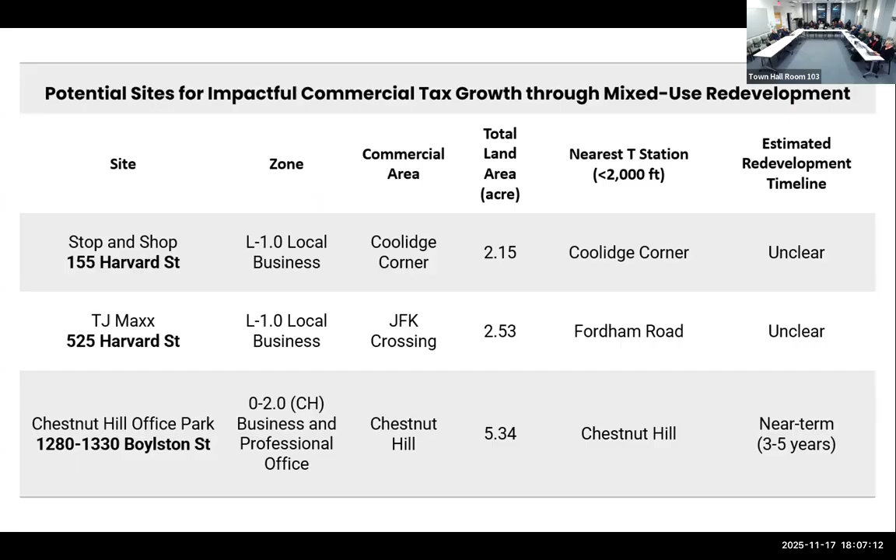Okay, so we've been talking a lot about the Chestnut Hill Office Park site because we have a live developer in the mix, who is providing real-time feedback on our proposed zoning and what that would translate to in terms of applicability. But also the Chestnut Hill Office Park site is unique, given its significant economic development potential. It's also double the size of both the Stop and Shop and TJ Maxx sites at 5.3 acres. So it's unique in terms of the study area, and it's unique town-wide. It's certainly a catalytic parcel within the scope of everything we've been talking about in rezoning and revisioning this area.

So speaking of tax revenues, I think this was presented to the Economic Development Advisory Board and the EDAB subcommittee, but I don't think the Community Advisory Group has seen these.

So we keep tabs on the kind of contribution from development projects that have been sponsored by the town's Economic Development Advisory Board, and what they've contributed to the tax base on an annual basis. The Economic Development Advisory Board has been around for 30 or so years, and this is a reflection of the projects they have championed and what the results have been.

In terms of additional contributions to the tax base, for FY25 the blue represents property tax and the orange represents rooms tax. For FY25, the rooms tax number isn't accurate yet, it's still an estimated number, but the property tax number is valid. Within the past year, about $7 million in property tax revenue, and we fluctuate between $1 million and $2 million for rooms tax revenue, through hotel room tax.

Looking more granularly at the properties that feed into these numbers, 2 Brookline Place medical office space generates about $1.7 million a year. Then a slate of hotels are our next highest contributors, with a range from a little over $500,000 to closer to $1.4 million. Then you have some office buildings — 10 Brookline Place West brings in a lot more tax revenue than that. This is just what EDAB claims as their portion that they helped support.

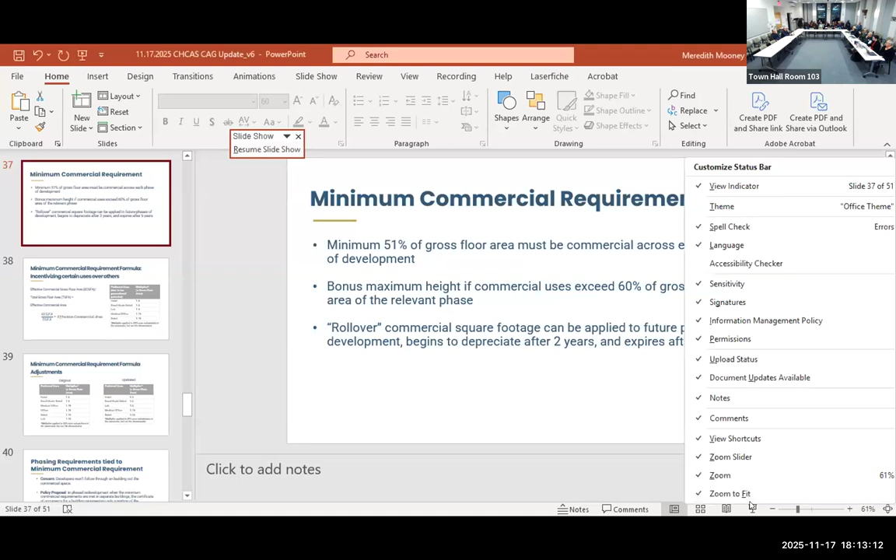The difference between the 45% and 61% is due to the multipliers given to specific uses. So all of the uses are the same, but the calculation is modified to reflect that certain uses are preferred either for their tax generation or because they're desirable to the neighborhood.

Sorry David, do you still want me to pull up the table? Nope, that the merge would be? Okay, drive on. Okay.

This is the existing zoning. It's a little choppy. A quirky element is that office of this block is under two different zoning districts. As you move closer to Hammond Street, it's kind of this puzzle piece effect where you're splicing together different commercial districts. This is Commercial 2.0, Commercial 1.0, residential.

This was back from June 2024, from a simpler time when we were just focused on the land use and how we would circulate through the commercial area, and not yet getting into the work of confronting the density that would be required to support some of these uses that we've identified here.

You can see also, based on the community engagement work and what we pulled from that, this concept of the central connecting greenway shows how early on we were focused on an east-west orientation for the buildings, which we've now come to understand that north-south orientation is a better fit for the study area.

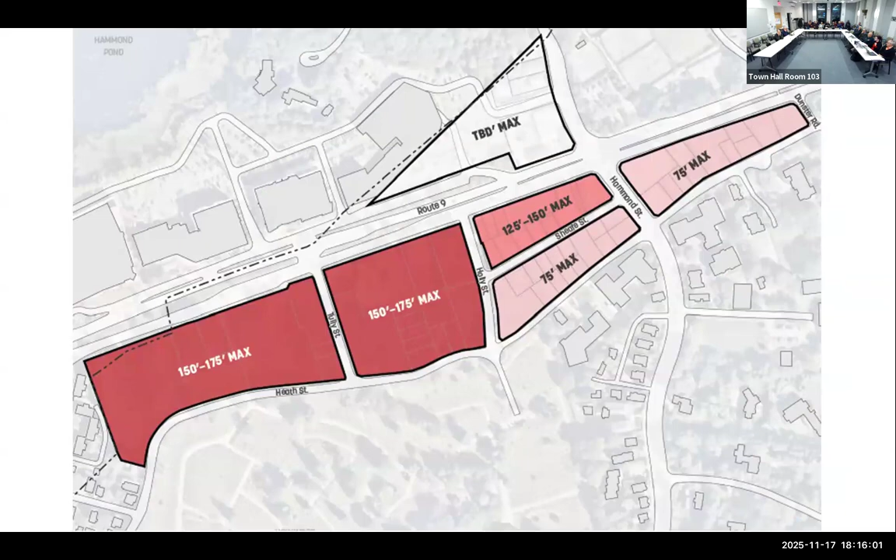Can you just remind all of us the current maximum heights? For...

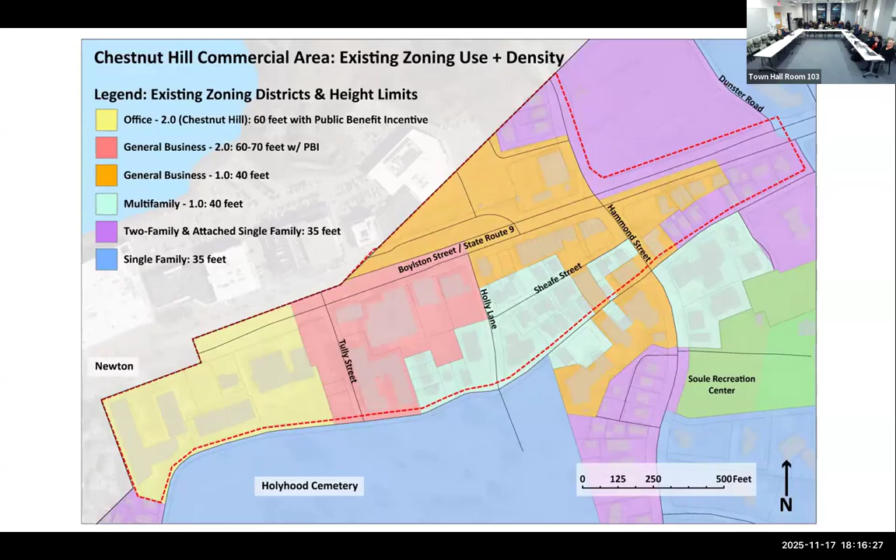The neighborhood mixed use is a combination of 40 feet along Hammond Street. 35 for the single family, and 35 for 2-family, 40 for the multi-family and general business in the 1.0. It's 60 for the office.

And here, Martin Zogren from Sasaki is going to be presenting the more comprehensive set of the draft design guidelines in a moment.

But this is the visualization, which I think we've been looking for a while in these conversations, of the proposed zoning envelope. We've made some modifications in terms of the sky plane proposal we had from Heath Street and the way that we structured the setbacks and step backs from the western edge, to push the height more towards the Tully Street side of the Chestnut Hill Office Park block.

So a key issue that was brought up in community advisory group member discussion, and then in public comment at the last meeting, was why 12 or 14 stories. People are still not totally comfortable, or very uncomfortable, with the idea of 12 to 14 stories.

I think we've been incrementally talking about the zoning components and how we landed here, but I did want to explain my thinking about how we landed on this recommendation. It's a combination of multiple factors.

Thinking back to the exercise that RKG did back in December 2024 with the lower scale level of development, what that looked like, and what the perceived trade-offs were at that point.

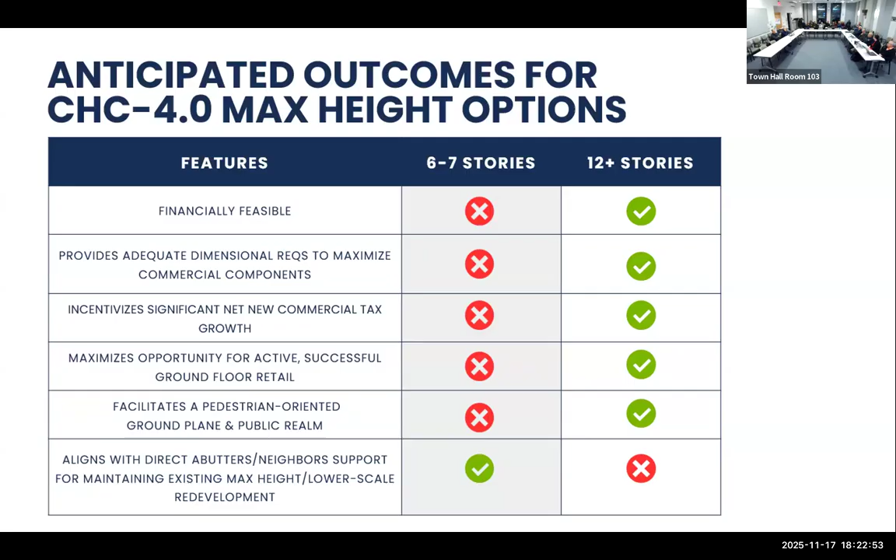Can you just explain why lower scale development has more parking requirements and is less pedestrian friendly? Why is it more auto and car oriented? Well, there were a bunch of things said in there — not pedestrian friendly, or auto intensive, and more parking.

So this was the RKG scenario. I think it's questionable whether this would do well — this isn't a financially feasible scenario, but you see the driveways and car access spaces dominating the smaller scale buildings.

You're going to need a smaller scale. You can't do underground construction. That's not going to pencil out. So you've got the parking, surface parking, in the surface parking or within the building.

And then there's tension between the parking at grade and the ground floor retail. They're going to need the parking accommodation, so you can't make as much ground floor retail.

I know this is a bigger discussion, but it depends on the proposal. You could do an underground parking that straddles two buildings, and the only part that is surface is, for example, the yellow building on the left—parking that goes from the yellow building on the left to the pink building on the right, including that plaza underground, and then above ground have those two units.

So it all depends on how it's all one property, how it's developed. I think I would look to George or Ken from the EDAB subcommittee to help address that question.

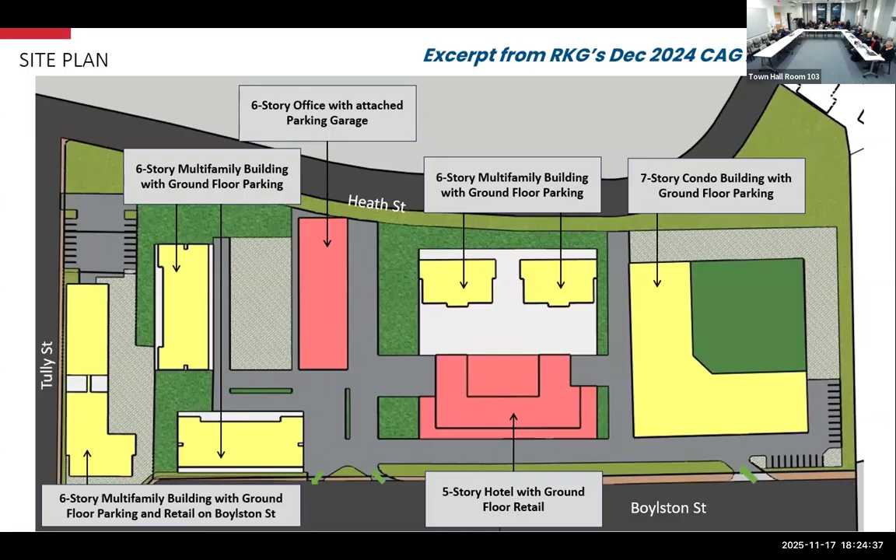So that's an interesting question. Underground parking is great, right? But the problem with underground parking is every underground space costs about $120,000 to $150,000 a space, and you generate very little revenue from it. So you need an enormous amount of development supporting that one parking space. That immediately drives a larger building.

If you want smaller buildings, then you're almost required to do surface parking, which just means a lot of blacktop. I think that's the short answer to the question. Thank you, George.

I'm just curious whether we're going to see some of the data behind the penciling out. I think it would be really informative to understand the numbers that inform some of these decisions. Well, I don't know that we're going to see that this evening, but if City Realty at some point wants to provide some of that, I think it would be very interesting to look at it.

The only other way to get at that would be to look at some other developments that have been completed where we can get data. But I appreciate the question. I understand the question—is that basically what you're saying as well?

Did you do this? We did extensive pro formas, and Ken Lewis—I have to give him credit—he did spreadsheet after spreadsheet after spreadsheet, really complicated analyses that incorporate not only parking requirements but parking alternatives, height, and how much they paid for the land.

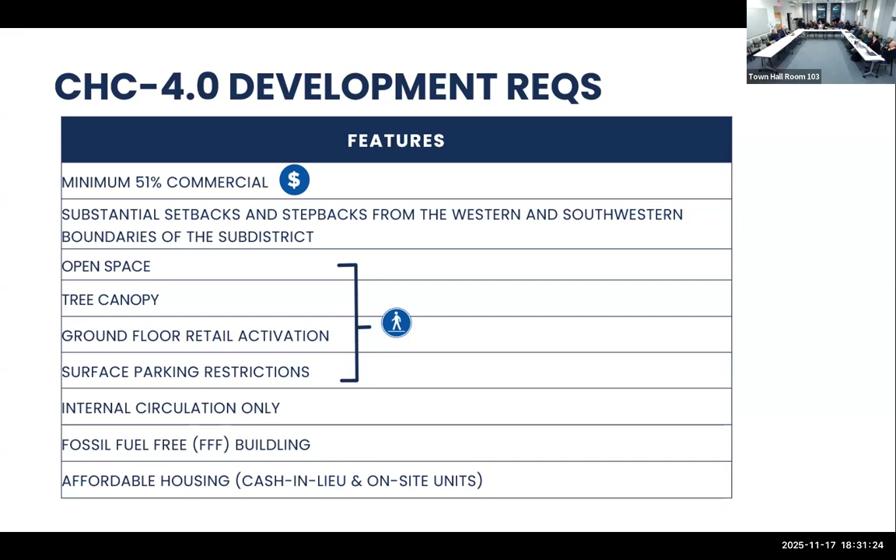So it doesn't really matter if it's 12 stories or 4 stories. But Carlos, it goes to feasibility. The affordable burden will inevitably require more square footage to support it. I think when people drive around outside of Brookline, to places like Rockland or Allston where there's a lot of housing development, they see 8 stories, or really it's more like 5 over 2 or 7 over 2, and they wonder why this brand new building can be 7 stories and why can't we do that here.

Well, if you didn't have any commercial requirement, you might head more in that direction, but when you add the requirement for commercial, that reduces the available space. But there are examples of ground floor commercial, you can see them on Market Street. Yeah, but there's a difference between ground floor commercial and a hotel, or a medical office building - those are very different situations.

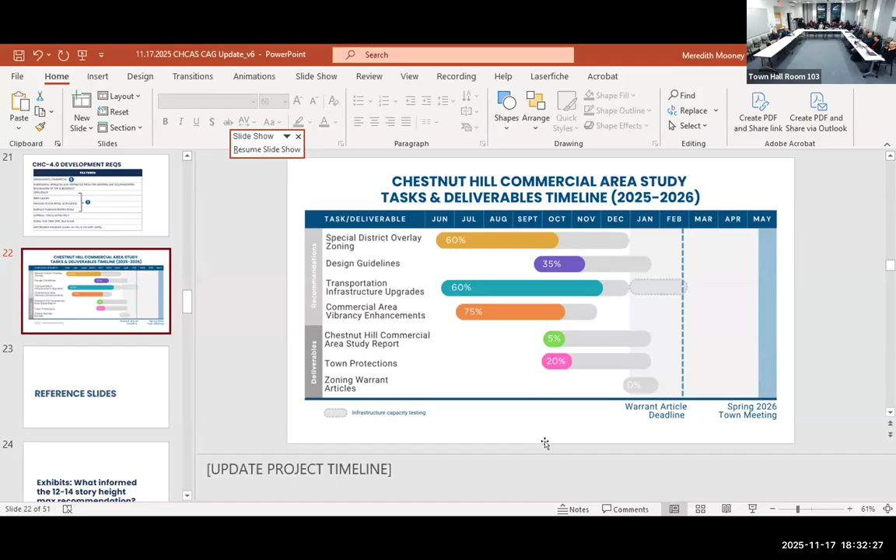Just a quick status update on where we're at in developing key recommendations and deliverables. We're still making gradual progress on the zoning, with some push and pull between the zoning and the design guidelines, which we're a little over a third of the way through. We're wrapping up work on infrastructure improvement recommendations and starting to focus on drafting that report, and also working on a draft memorandum of agreement with City Realty. We'll provide updates on that, probably at the December meeting when we're further along, and present those recommendations. So that's the staff update on Chestnut.

Let me make this full screen. Can everybody see that okay? Full screen? Yes, excellent. Good. So tonight I'll try to go through these relatively quickly, and I know that there's some discussion that's been reserved for a little bit later on.

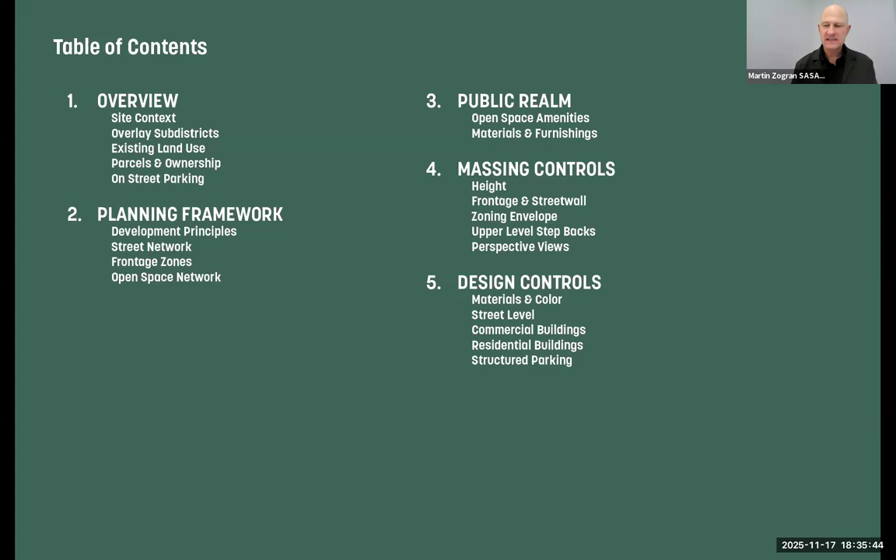We'll look at those massing controls and then some of the other design considerations that will go into the complete package of design guidelines.

So in terms of the overview, the site context, very well. These are pages from the upcoming design guidelines report that we will be sharing with you, with Route 9 and Heath Street being two of the most important corridors, north and south across the sites, of course, with the Stop and Shop site in the upper right-hand corner.

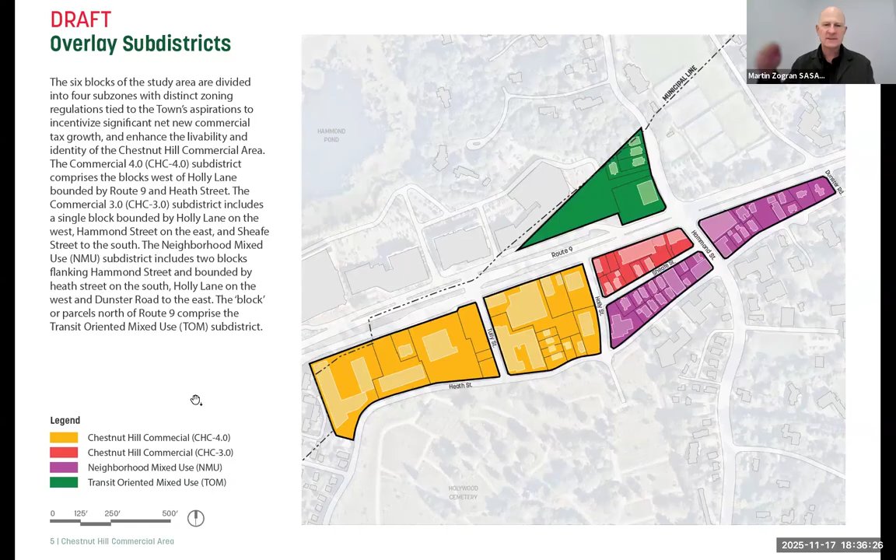You also know, in terms of the overlay sub-districts, there are a total of 4. So the Chestnut Hill Commercial, which is the 4.0 in yellow, the red Chestnut Hill Commercial is the 3.0, and then the mixed use and transit-oriented mixed use. This is the proposed moving forward district plan.

Some of those existing land uses, as Meredith pointed out, are a little bit fractured and fragmented. We know there's a combination of commercial buildings and residential, from multifamily to single family, across the site, with some interesting conditions along Route 9 itself.

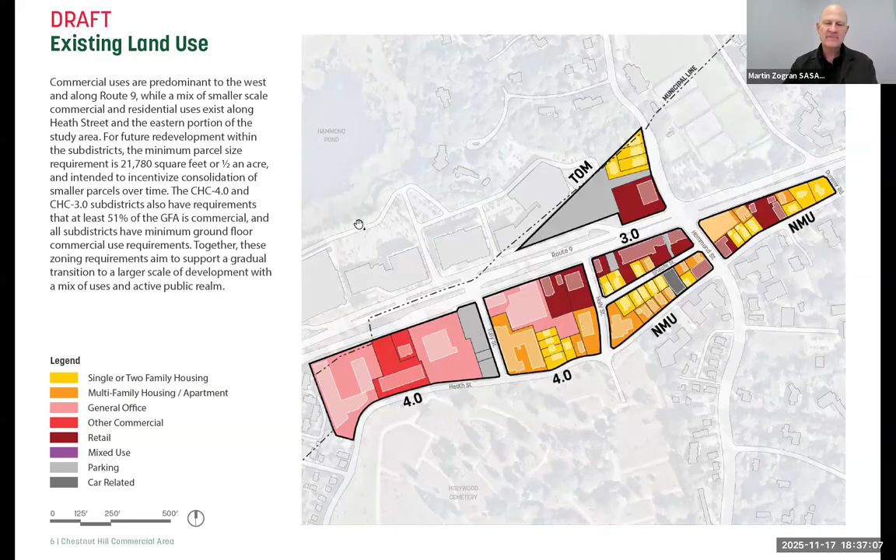Sometimes there's a setback, sometimes the buildings are actually close, and that speaks to the changing nature of Route 9 over the past 40 or 50 years, from what had been an urban street to much more of an urban arterial with higher volumes of traffic. On the other side, that Heath Street edge adjacent to the cemetery is very different from north to south. But basically, those are some of our existing land uses.

In terms of the planning framework, I wanted to pause here and say, what are we aiming to provide? I think Meredith and others made a great argument about the values of high density and mixed use, and that 51% commercial that you're looking to provide, which is essentially about increasing your commercial tax base for the Town of Brookline in a substantial manner, to go from approximately 7 million up to somewhere maybe around 12 million, a substantial benefit.

So that high density mixed use is something that gets you there, but it also means it can provide an enhanced public realm experience if you make sure to focus on that experience that people know and see and touch and feel as they move along Heath Street, as they move along Route 9, for those ground floor experiences.

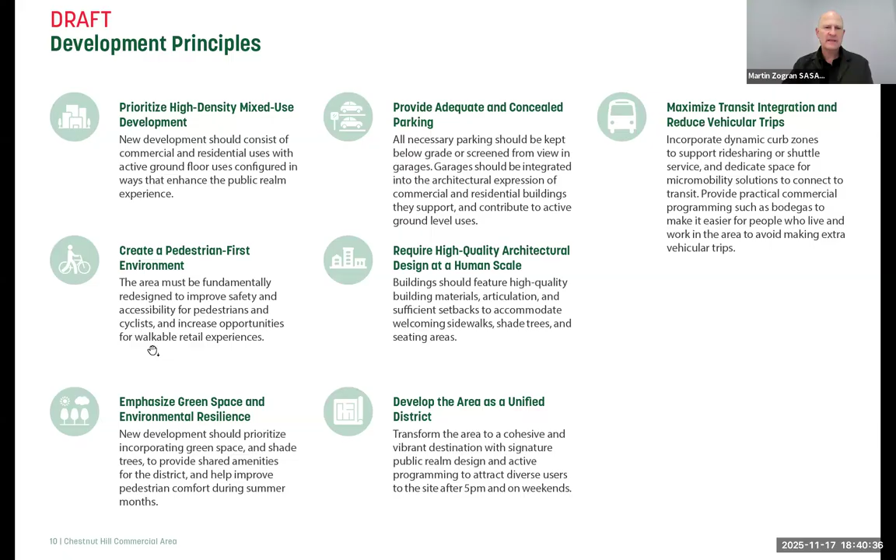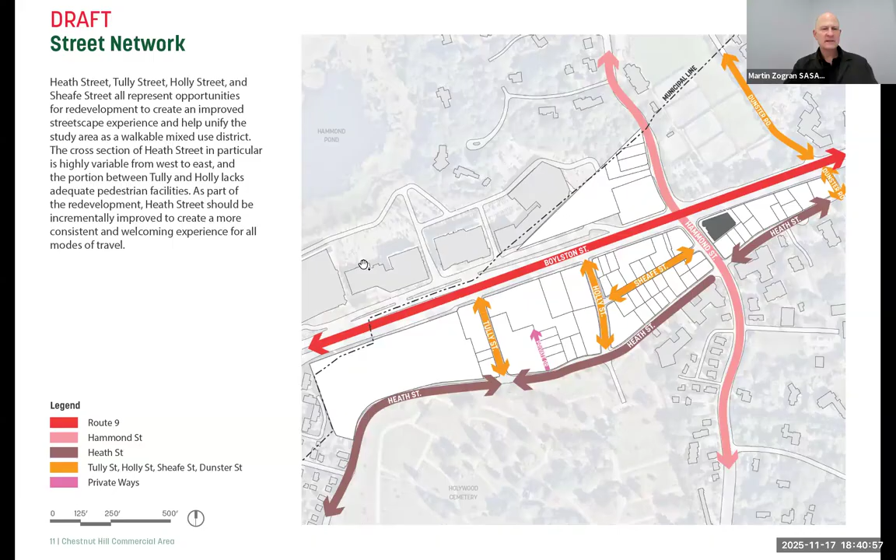So the overall development principles, just to spend a little bit of time there. I think we'll hear more about the street network and streetscape from Kittelson and that hierarchy, of course, from Route 9 to Heath Street - two very different streets - but also thinking about Tully, Holly, and Sheafe Street as they wind through, and the connectivity that Hammond Street provides more broadly up to the Green Line station.

Now, I want to pause here just for a second to illuminate a little bit around what we're calling these frontage zones. I mentioned before the history of Route 9 as something that's gone from a rather suburban street in years past, with single-family homes and residential development, to now a very busy urban arterial that's much more highway-like as you move down the street.

And as such, you see very little on-street parking. The cars are moving very fast, 40 to 50 miles an hour in many places, fewer signals, and greater setbacks for the buildings immediately adjacent to the street.

So the colors here really represent - if you look at the red and then the blue or purple color a little bit more to the west - the areas where we're transitioning from a more snug urban condition closer to Route 9 to what we're calling more of a campus frontage, which takes advantage of a little bit more open space between buildings and a campus-like feel in terms of maybe higher buildings broadly and a little bit more open space. So that's a designation there.

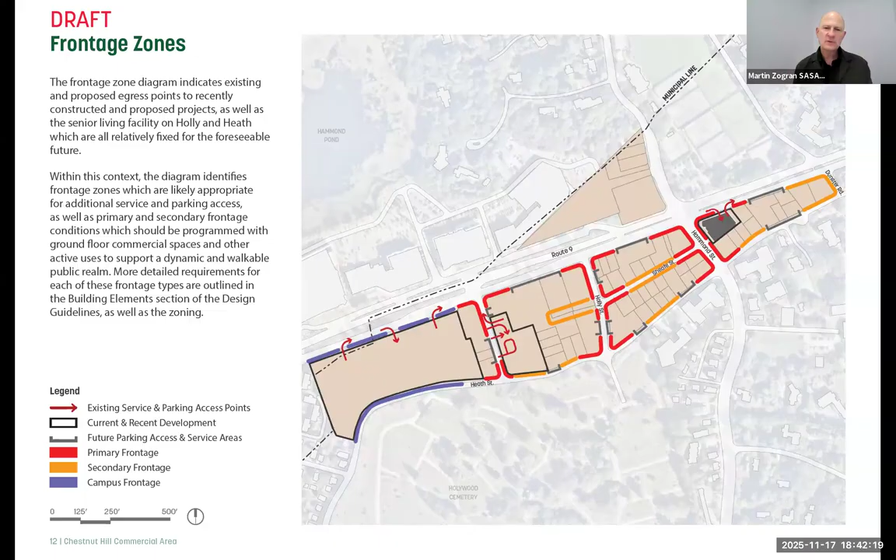And then that secondary frontage, and many of those conditions that are either mid-block or internal to the blocks themselves - but you want to hold the corners where it makes sense.

And another thing which Meredith mentioned from a plan some time ago is how do we think of this whole thing together and think of the open space network? Of course, the cemetery is a great asset to the community and open space, which is green and verdant and quiet because of its users.

In terms of that public realm, again, in working with a number of developers and with the City of Boston for many years, we find that the single most important aspect to require of developers is really making sure the open space is the highest quality possible. And that includes the programming, the detailing, the activation, the simple things like providing chairs, providing bioswales, infiltration, greenery more broadly. And if you can get the public realm correct, oftentimes that helps alleviate some of the impacts, shadows or otherwise, of slightly higher densities.

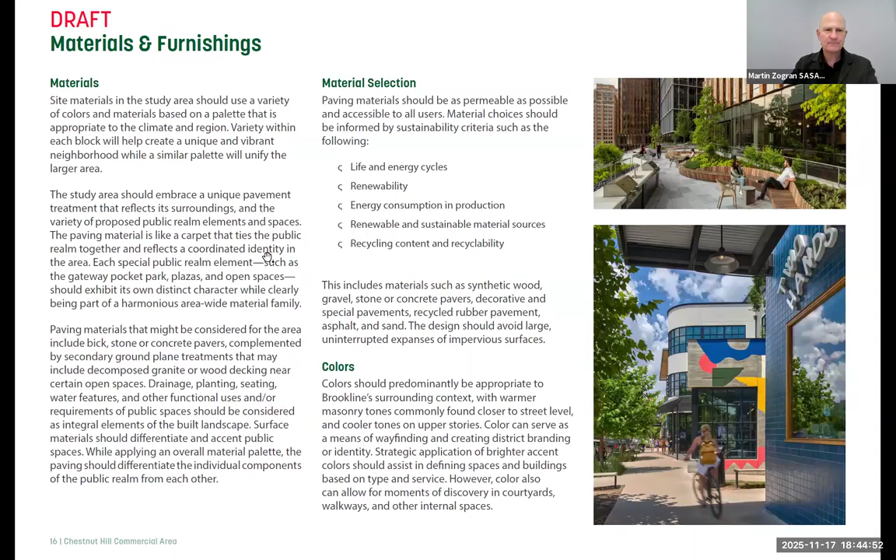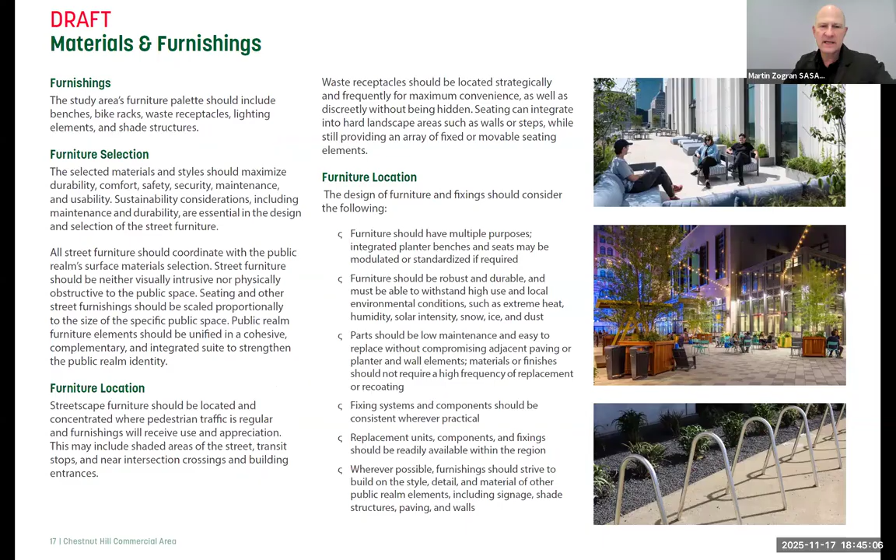Some of the other aspects, again, in the details here, go all the way from bike racks to seating, making sure that we're providing for that public realm, which is supporting the overall development and the overall quality that Brookline has come to expect.

One of the ideas here is also around this frontage ratio, which is basically the amount of buildings that you have adjacent to the streets themselves. The lightest purple on this diagram, which you can see is the lower level and upper level frontage ratio, are those smallest numbers, the 50 to 60 and 60 to 70, meaning that we're really trying to provide for the greatest porosity, opening, or green space as we move from Heath Street very specifically north into the project itself.

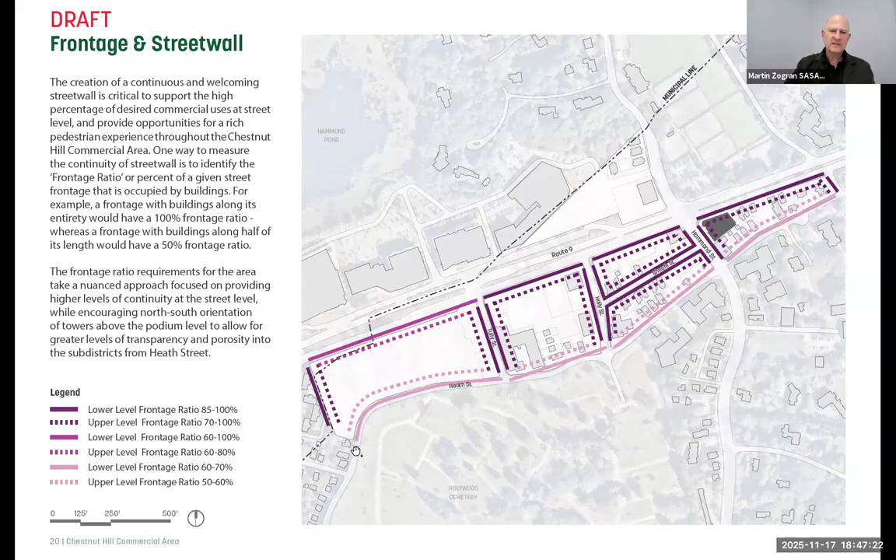So that's where we don't want to create a wall effect. That's where orienting the buildings north-south rather than east-west has been the major work this committee has undertaken in the past, to work with the developer to figure out what the ideal massing could and should be for this site. Again, the important thing here is that lowest number of frontage along the Heath Street edge, to preserve the quality of that area itself.

The massing that Meredith has shared with you as well begins to look at a stepping diagram, a series of steps away from the cemetery along Heath Street, and then much more drastic step downs to the 125 to the 75 in the east of the project. In the commercial Chestnut Hill commercial area 4.0, there's also a substantial step down to the west, closer to the residential fabric, to help both preserve the open space and trees in that area, but also to step and be compatible with that community just to the west of the site.

So that's the overall massing envelope from a sort of abstract sense. And here we see those buildings currently in place, those existing buildings that you have today, varying heights, but relatively low, relatively modest buildings, in terms of what those envelopes allow for.

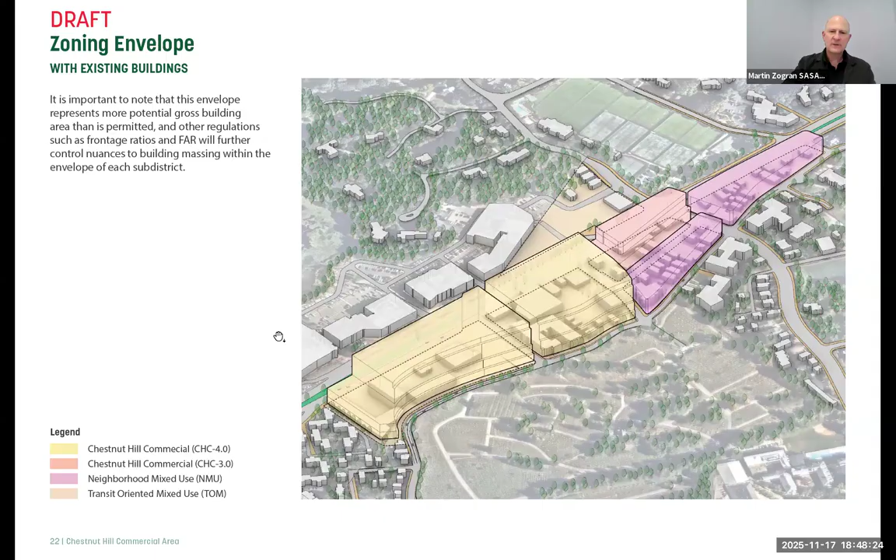The setback is very generous away from Heath Street, closer to 30 to 40 feet back, which again provides for the possibility of a double row of trees and open space in that area, as well as able to accommodate a driveway, given that you want the circulation to be internal to the site itself. So some of those upper level step backs, as we've seen in many projects across Boston, can be quite effective in mitigating mass.

They help to break up the volumes, to make you focus on the ground floor levels, and to allow for light and air into and around the adjacent areas.

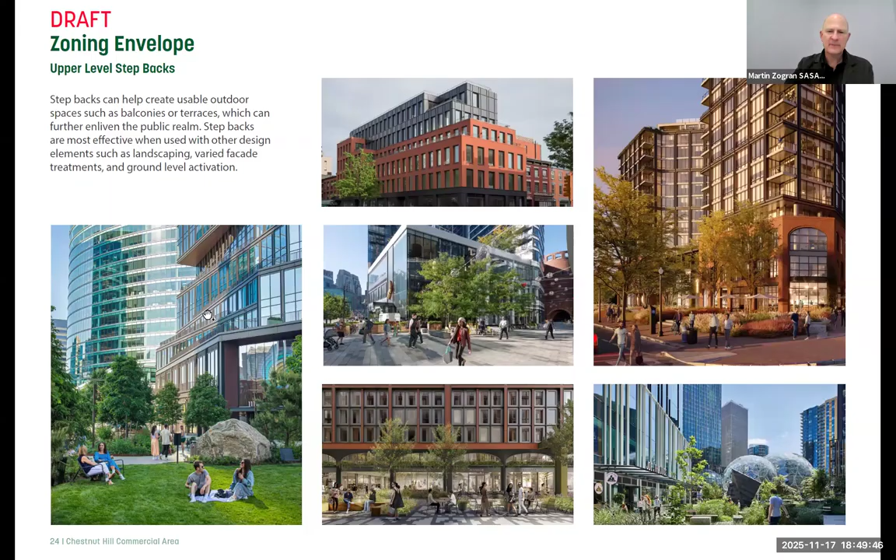Just some visual examples of what that potentially might look like in a number of development proposals we're seeing across the city. So the existing condition we all know really well of Heath Street. We've had the pleasure of walking this several times with Meredith and her team, looking at that great canopy of trees, which is from the cemetery side as well as from the Chestnut Hill office side.

While the following renderings could use some more trees, we wanted to show, at first blush, more trees in this rendering, but we wanted to begin to show what that setback would be along Heath Street and this idea of setbacks as you move up the building to that 12th to 14th floor range, the setbacks of 10 feet, the rounded corners helping with those volumes.

It's a bit shocking to see an image like this, I realize, but we'll all be looking at the trade-offs and how we can best shape this proposal to meet your needs and the needs of the overall community from a variety of perspectives.

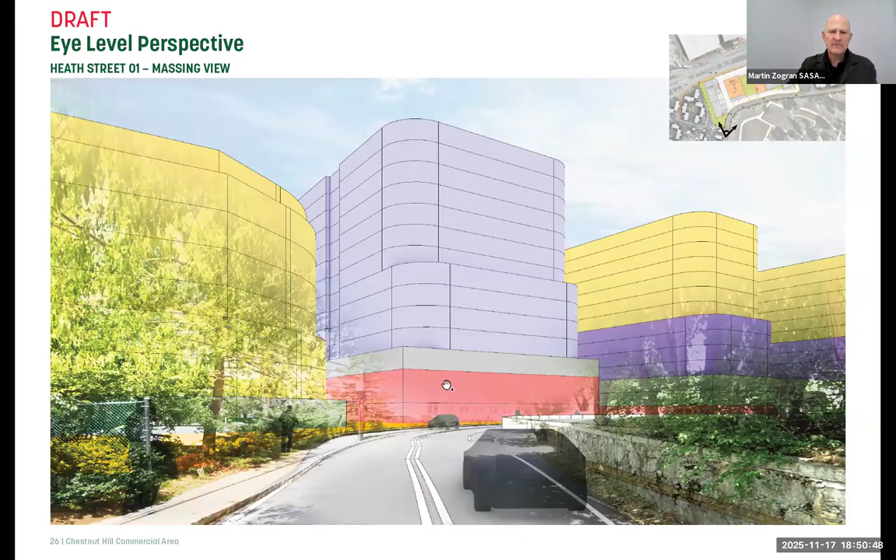So just a quick rendering. This is not what the building will look like—Meredith and her team will work with Feingold Alexander, the architects, on this—but it shows the ability of changing materials at various levels of the project to help create a public realm, help mitigate the height and density, and make sure we're maintaining a robust tree canopy in as many places as possible.

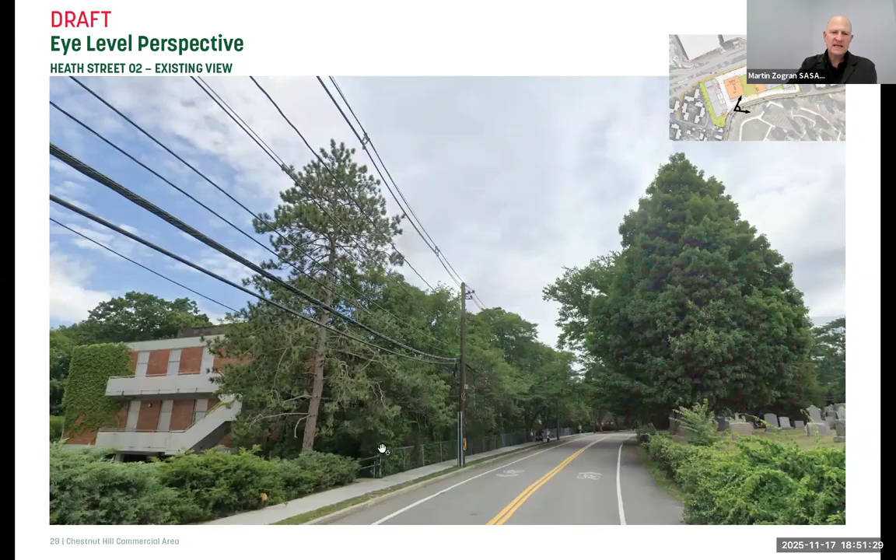As we move a little farther down Heath Street into the site itself, again looking at the existing tree canopy and hoping to save as much of that as possible on the Chestnut Hill office site. What that potentially means—we'll add in more trees to these renderings, certainly.

The design team is working to create a more robust landscape at the ground levels, and in these red massing areas—again, very preliminary—these red areas are really where retail would begin to invite you into the site, into some of those open spaces.

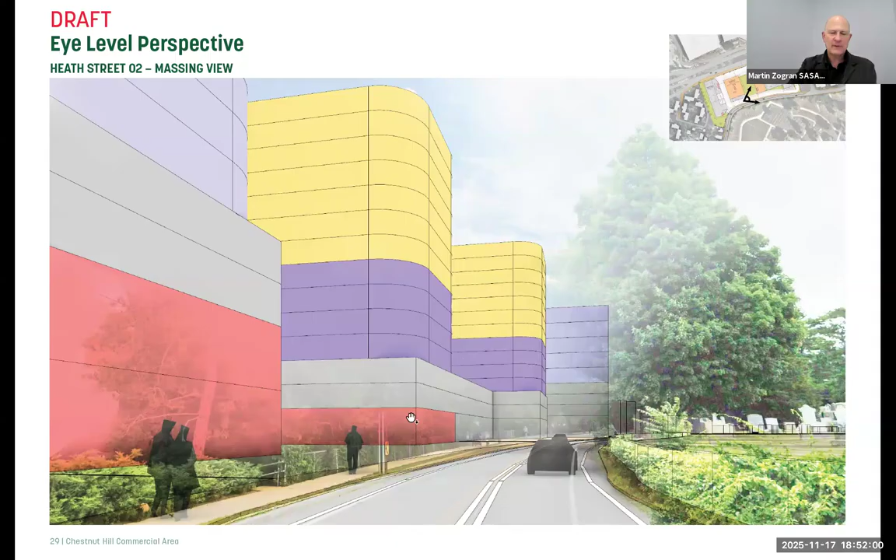This is color coded as per some of the other land uses we might see, with gray being the garage, which would be screened. That's some of the above ground garage in this example.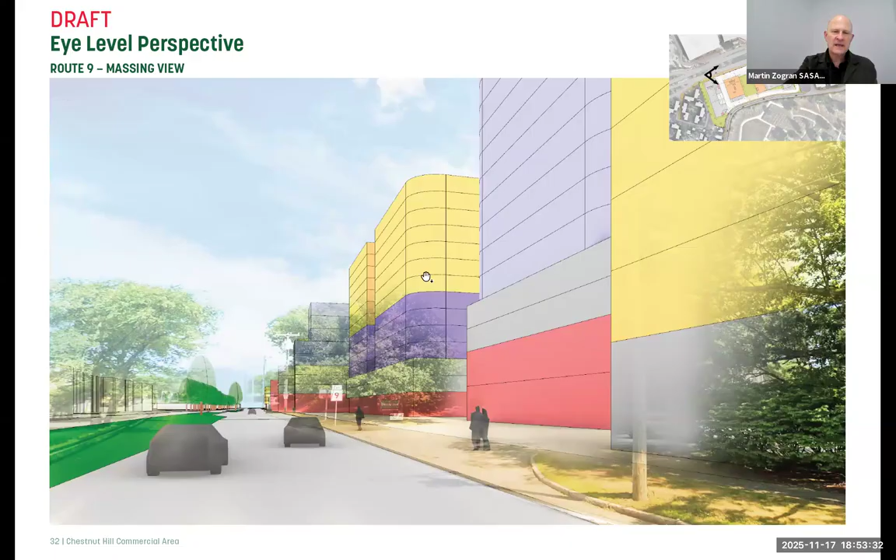Again, color coded as per the land uses in terms of hotel, medical office, residential, and retail, which is very important along Route 9 itself.

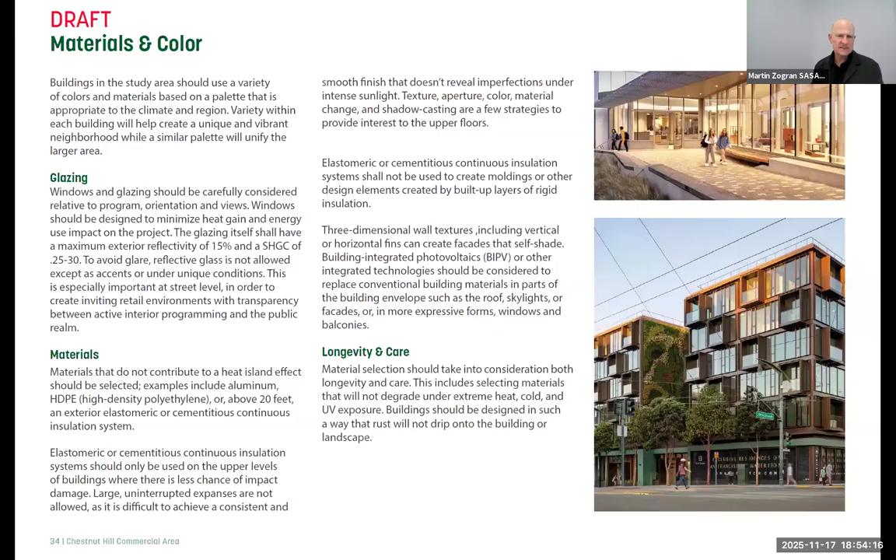There's a section on design controls, and I'll go through this relatively quickly, but within the design guidelines we're being very specific about making sure the proposers—the architects and developers on the project—are really following good building standards when it comes to windows and the quality of materials, getting the highest quality project for you all, which Brookline deserves, as does many other areas of the city, making sure it's of a quality that is very high for the overall community.

So the materials and color, the activation at the street level - what are we looking to create? Whether it's pedestrian interest, pedestrian scale materials, shade and comfort, both winter and summer. We're also incorporating unique accent materials and art and programming where appropriate, and looking for transparency at the ground floor so people can feel engaged and look inside, whether it's retail or commercial uses, and making sure floor-to-floor heights are high enough to feel accommodating and welcome.

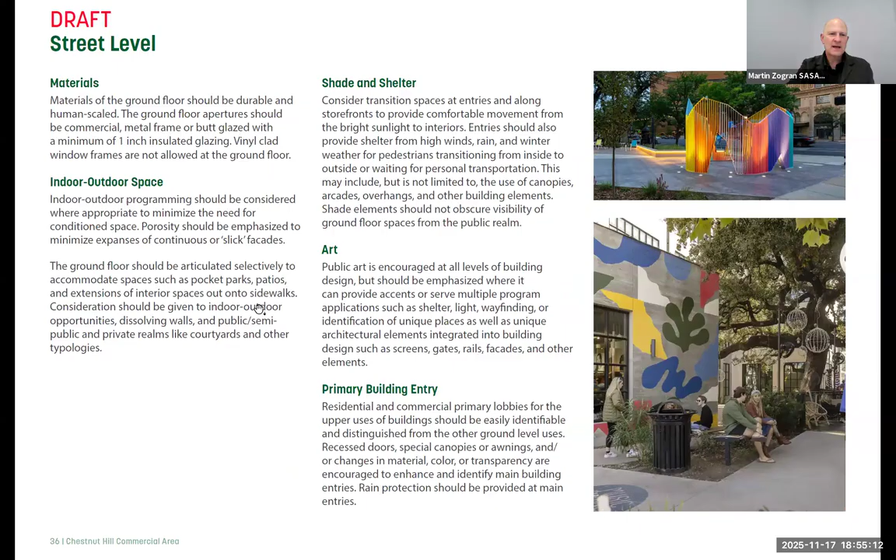We want to incorporate art as much as possible, make it easy to find the primary entries, and have spaces that work all season, indoor and outdoor, both summer and winter. Finally, we're looking at activating that street level with a series of stairs and steps where we need to go up and down.

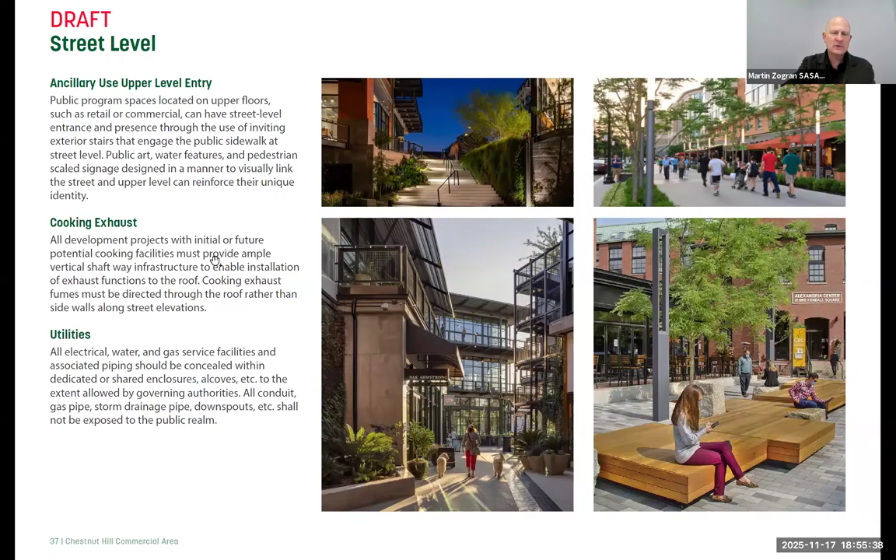We're not pushing exhaust out onto the pedestrians themselves, and making sure that utilities are not obstructing the creation of a beautiful public realm with electrical boxes or utilities showing up in unwelcome places.

So we'll look at both commercial buildings and what those might look and feel like, as well as residential buildings and that mix of the two - the windows, outdoor spaces, servicing and loading, and also thinking about the roof experience, entries, and facades.

It gives you a good idea of the overall structure of what goes into design guidelines, and how much attention we pay to all the different aspects.

And then for something like structured parking, we want to make sure those entries are as hidden as possible, that they're not obstructing pedestrian uses, and that the garages themselves are screened to the greatest extent possible so they're not visually obstructive to the overall experience. So those are all the slides.

It was a lot to get through very quickly. I'm sure we'll come back and focus a little bit on some of the street level views and talk through the massing, but this is meant to give you a sense of all the elements that go into design guidelines.

I think the takeaway here is, if possible, to focus on the positive aspects of the public realm - the setbacks, the planting, the trees - to mitigate as much as possible what might be perceived as extra density, and then think through some of the benefits of having that density, as was discussed before I started this part of the presentation.

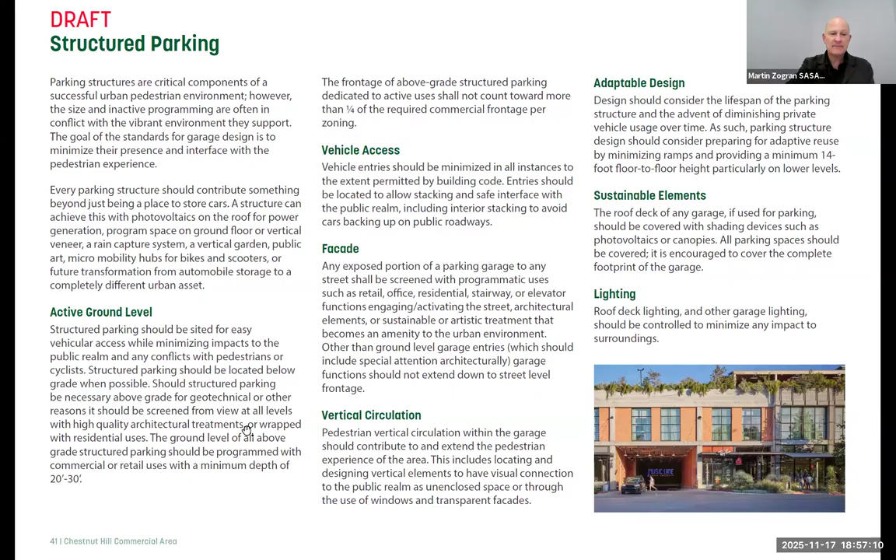Thank you so much, Martin. Sure. All right, go ahead.

Could I just make a point in terms of feedback or things I'm really interested to hear from the Community Advisory Group, EDAP subcommittee members, and the public - the concept about the frontage and street wall. I think that's the tool we're hoping to use to incentivize the north-south building orientation. Do you think that's an effective tool for that?

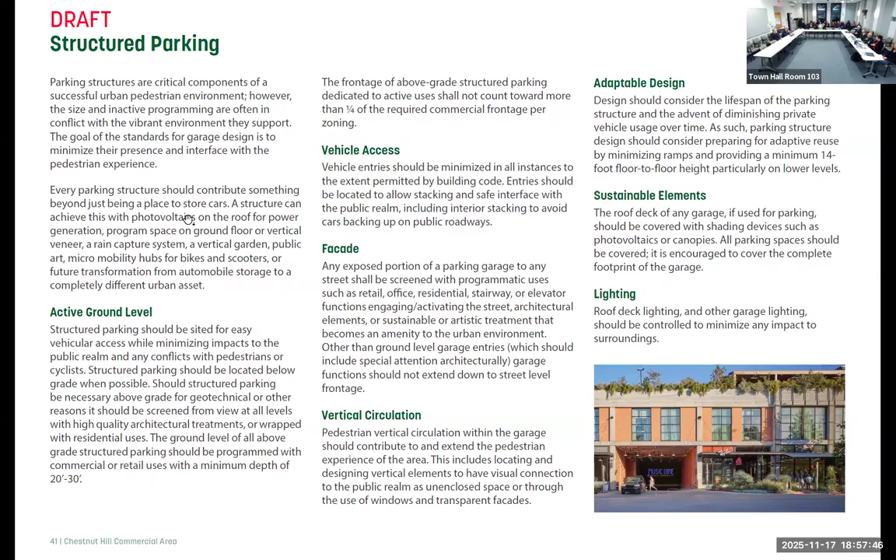Can we go back to that slide? Sure, okay, so that was the first one - the revisions to the Heath Street step backs. And then this is the first time we'd seen the broader perspective about the green space network.

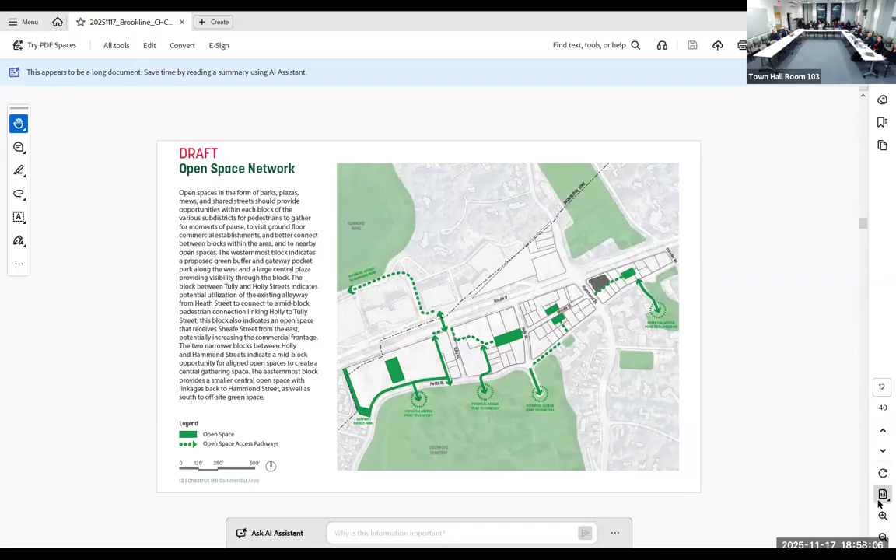I should also say, stay on this one, because I think the private tennis court, Carlos, is not necessarily open space - but why don't we get all the questions first.

Just one point in terms of order of operations for the design guidelines: the format is that we've got several sub-districts, so we're starting with the 4.0 and fleshing that out. That's going to be the template we apply to the rest of the sub-districts. So this is a mix of the 4.0 with some broader considerations of the study area, but I wanted to let people know we'll also be working on the neighborhood mixed use, the 3.0, and the transit oriented area.

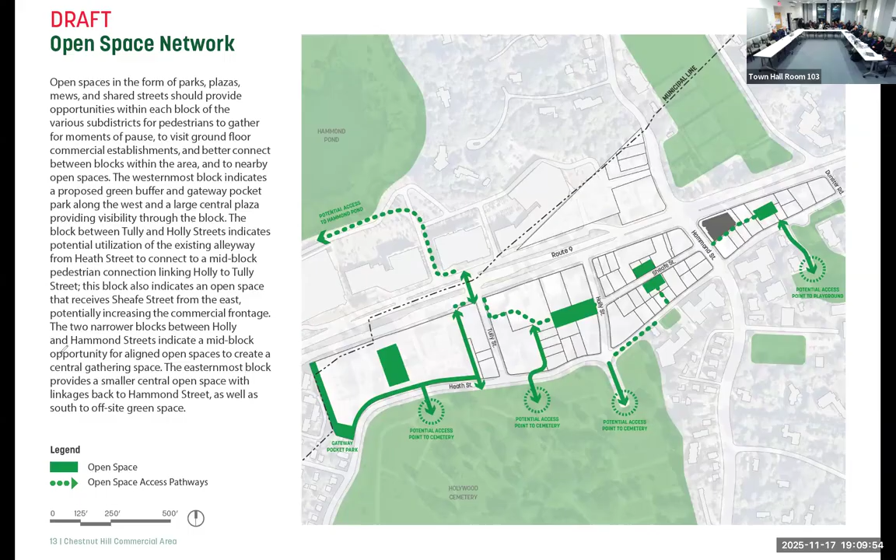Okay, other comments, David, and then George? I guess I have two questions. One is just if you advance a couple of slides to that frontage slide, I'm not sure I totally get what it's driving at. I think I understand the intention around the City Realty parcel and Heath Street, because we've been talking about that for over a year, and that's a very light lavender line, meaning that there's less building or more breaks between the buildings, but I'm not completely understanding kind of what's being said here.

My second question is about how much consideration has been given to scaling the Boylston Street side. Because if we're talking about a 14-story building without any urban scale step backs on that side, we've got the low setback buildings across in Newton, and on this side we just have a very, very tall wall.

We only have so much juice to spread around. But on the other hand, one thing that occurred to me after our last meeting was that the buildings on Boylston Street are set way back and then flat and very tall, and I understand that's because you need to move the cars through there. I was puzzling over whether there's a way to move the cars under the building and bring forward a 3 or 5-story building mass, still have the hotel drop-off on the ground level, but have a more pedestrian urban scale along Boylston Street. Because a 14-story building set 30 feet back from a 5 or 3-story building means you don't really know it's there when you're on the sidewalk.

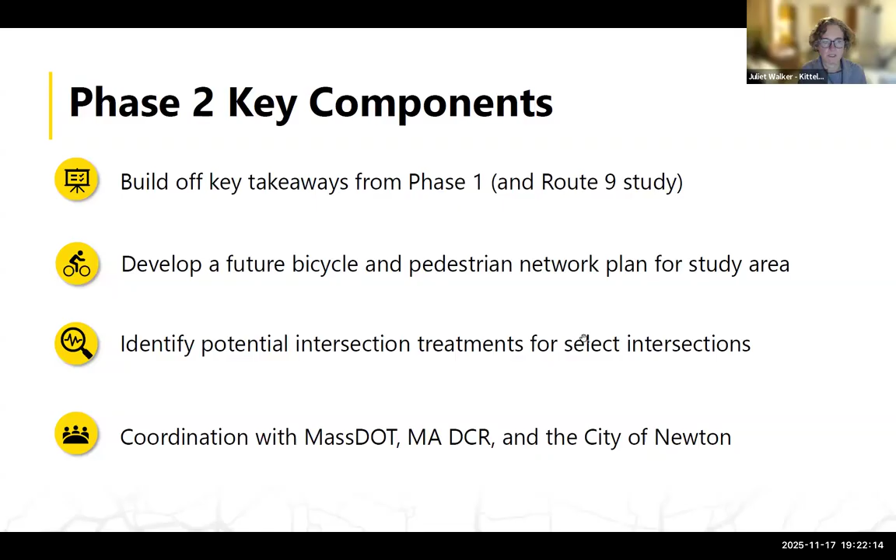Yep, all right. So as Radu mentioned, a reminder about where we are with the transportation study: we're in phase 2 of the study, with phase 1 being the existing conditions, setting the stage. Tonight we're going to talk about the proposed future bicycle and pedestrian network plan for the area, and also talk about some potential intersection treatments for select intersections.

Again, just a review of the purpose of the bicycle and pedestrian network plan. We are building off some prior plans and engagement around creating a walkable and bikeable network, focused primarily on the roadway corridors in the study area, but we also talk a little about some of the private properties and potential there. We're also focusing primarily on facilities for pedestrians and bicycles, but also looking at some traffic calming measures for general vehicular traffic as well.

I just want to talk a little bit about the prioritization process. This was sort of the first step in developing the network plan - a prioritization planning exercise, really looking at street segments within the study area, and how the aspects and characteristics of those segments can inform where there is highest demand and need for walking and biking facilities.

We conducted the prioritization analysis based on the factors listed here. I'm not going to spend a ton of time on this, but I'm happy to go back to it. In general terms: proximity to activity areas for both biking and walking, the quality of existing facilities, existing bicycle and pedestrian volumes observed through our initial data collection, and crash history.

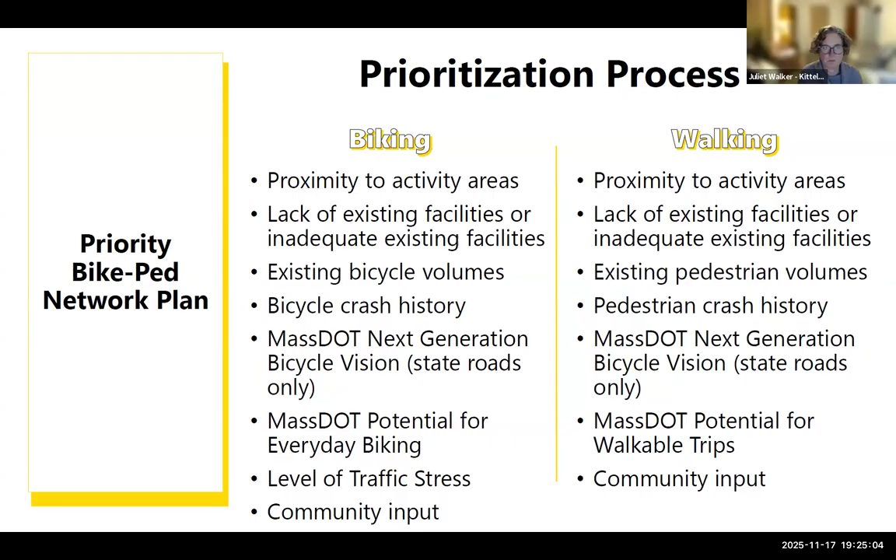And then level of traffic stress, which evaluates a few different factors to understand overall comfort for a certain facility for bicycles in particular, and also community input. On the walking side, all those factors minus the level of traffic stress, which was primarily focused on biking. All that being said, the first stage was to develop this prioritization analysis.

Now, you'll notice as I explain this, we aren't just focusing our recommendations on the higher priority locations. We understand all of this is part of a network, but we did want to understand and have a basis for some of our recommendations related to where you should be focusing, where you can have the most impact on overall multimodal safety and comfort.

The results of our analysis - you'll see the darker brown colors, if you can distinguish that color, are the higher priority locations; they ranked higher overall through the prioritization analysis. You'll see, for example, the concentration around the Hammond Pond Parkway intersection, influenced by the ability to connect to the shared use path on the north, the ability to get to a variety of activity areas, the overall stress of traveling through that area due to the large traffic volume, and the general confluence of a lot of things going on there.

Similarly, you can see the other intersection at Hammond and Route 9 - similar reasons for high priority. The darker orange - most of Route 9 is a darker orange or brown - again indicating that there's high potential for improvement of that area for prioritizing bike travel.

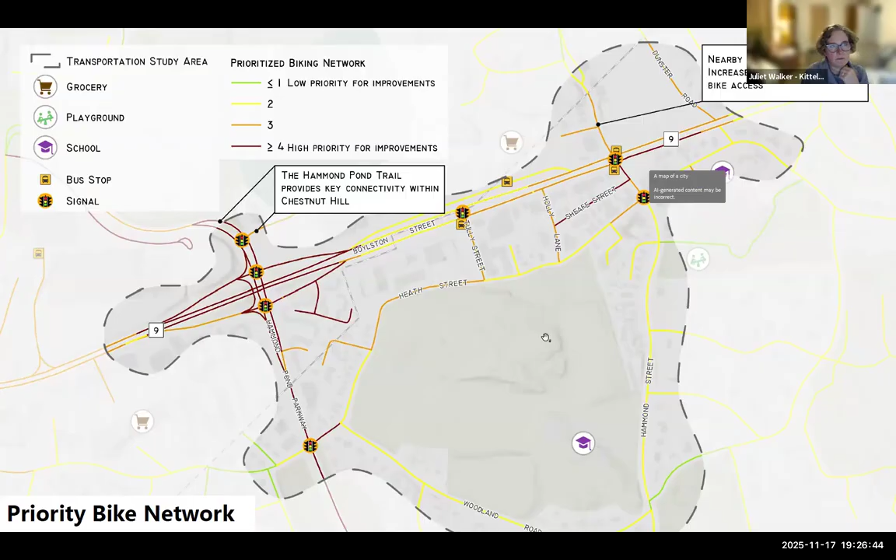Focusing in on Boylston Street and the Route 9 corridor. Along this section, as I mentioned, falls high in the overall connectivity prioritization. It's currently uncomfortable for pedestrian and bicycle travel, not everywhere, but in most locations due to limited dedicated facilities, high speeds, and volumes. I think it's pretty intuitive about what makes this area a little bit uncomfortable, and very uncomfortable for some.

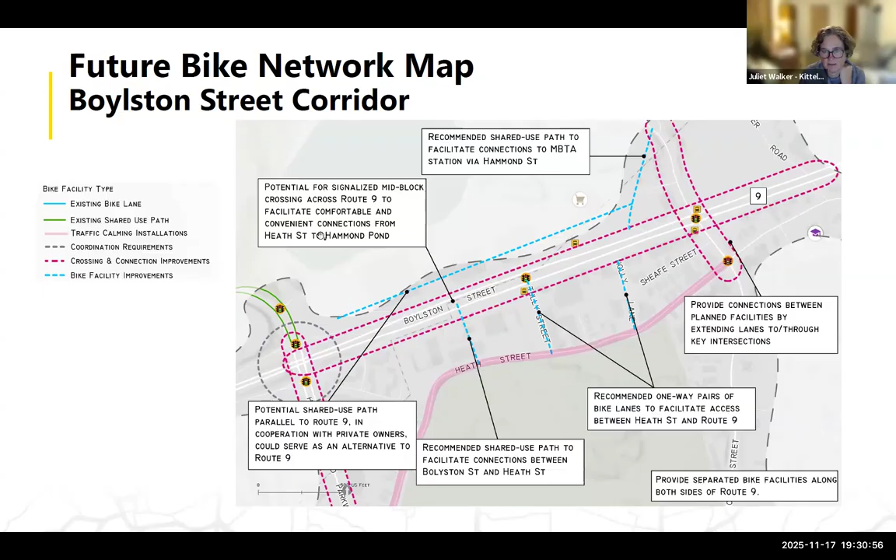Tully Street and Holly Lane right now would be constrained for dedicated bidirectional bicycle facilities, but you could either do this as a paired bicycle lane, one way in one direction on Holly Lane, one way in another direction on Tully, and or, as I mentioned before, work with abutting property owners to look at opportunities to widen for dedicated bicycle facilities. So that's the Route 9 section, and I can come back to each of these if there are specific questions.

Briefly for the Hammond Pond Parkway location, the focus here is extending shared use path connections that currently exist north of Boylston, south into Brookline, and then also facilitating connection with the bike lanes along Heath Street. Also, all of these would be in conjunction with intersection improvements that we will consider later on in the presentation.

And then along Heath Street, I alluded to this earlier. Some sections of Heath Street where there's likely to be new development, looking at opportunities to provide a separated path, shared use path along Heath Street, maybe in conjunction with a public realm improvement. Areas that are currently primarily residential where that's not likely to happen, looking at traffic calming, similar to some potential improvements along Woodland Road as well, where you've already done some initial traffic calming, looking at other mechanisms for making it safer and more comfortable for bicyclists to share these travel ways with cars.

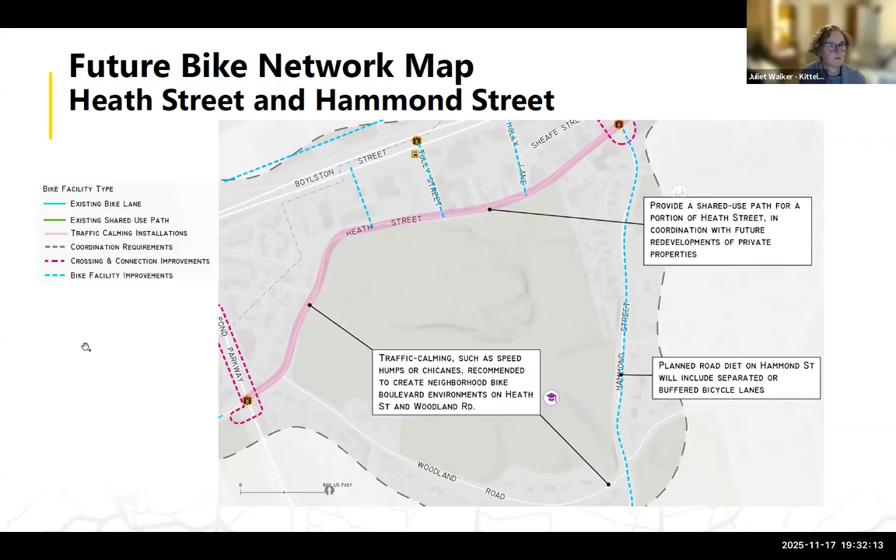Noted earlier in the presentation tonight were the opportunities for widening sidewalks. So if you're expecting a lot of pedestrian traffic along some of these areas, looking at opportunities to really make those sidewalks comfortable for folks to use two-way and with strollers or mobility devices, et cetera. So looking at opportunities for widening sidewalks in conjunction with private property owners.

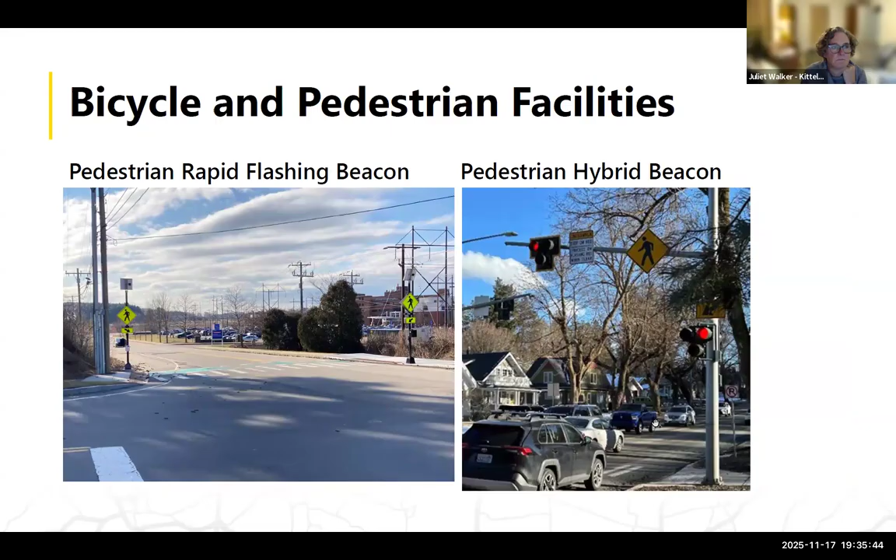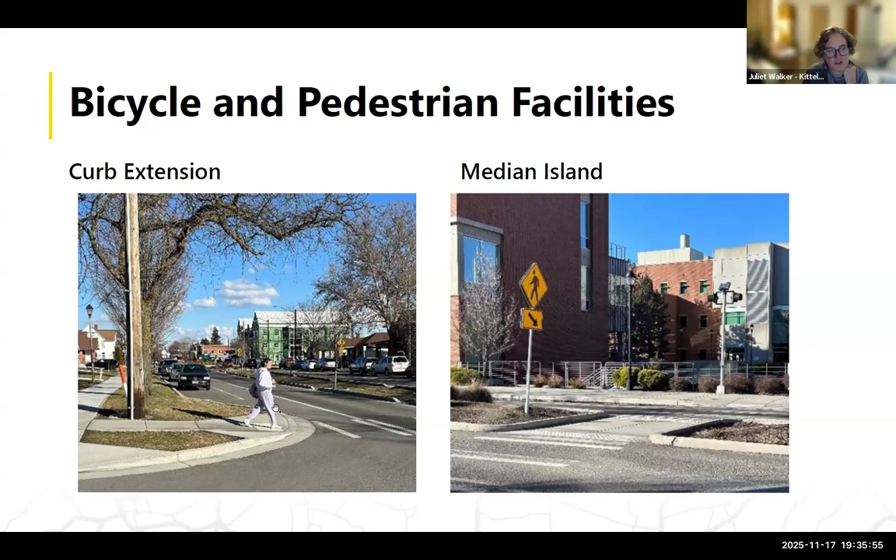Curb extensions and median islands - the median island is already out there, and there are some opportunities for improvements on Route 9. Curb extensions are another traffic calming, high visibility treatment for pedestrians.

I alluded to the idea of chicanes or traffic calming, which is considered horizontal deflection. You can do both median treatments as well as chicanes or bump outs that cause traffic to meander, which slows traffic speeds. Then there's vertical deflection, which you're already applying on some of your roads - the speed hump is most common. Also a raised crosswalk, which I talked about before.

All right, so that concludes the bicycle and pedestrian portion. I don't know, Meredith and folks, if you want to pause and talk about that first before we go into the intersection.

I think I'd like to go straight through and then we'll come back for questions. That sounds great. All right, then I'm going to turn it over to Radu, although I'm going to continue to present. Thank you, Juliet. I'll try to speak towards the public so everybody can hear me.

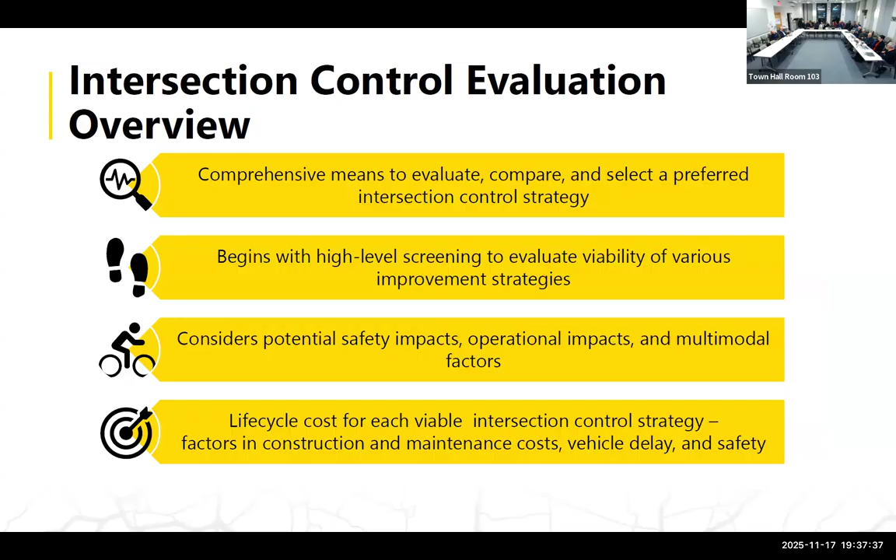In the last meeting, we noted that we're going to use an intersection control evaluation procedure, which was developed by MassDOT and is used on their projects. The reason we're using this procedure is because it presents a comprehensive approach to evaluating intersection operations and intersection changes. It also considers safety and mobility for people walking and biking, so it integrates well with the design guidelines for the site and with the bicycle and pedestrian plan. So that's the procedure that we're using.

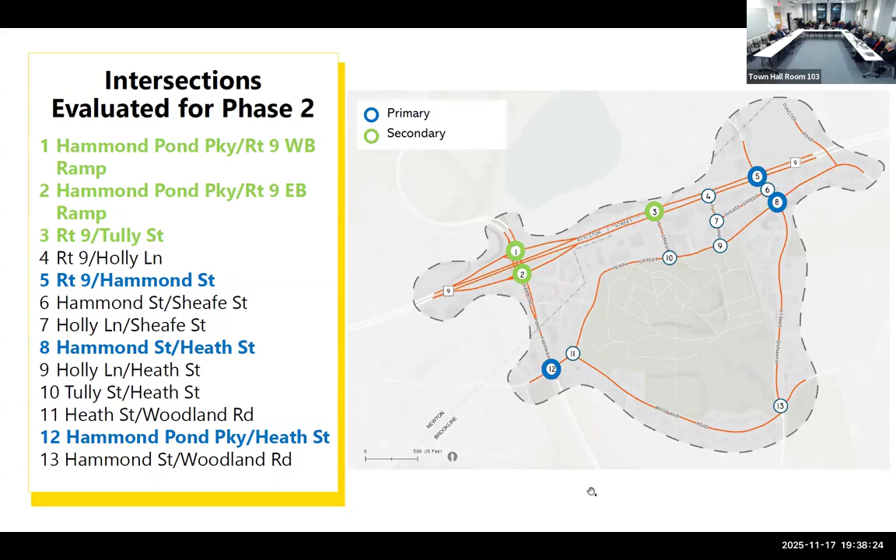From the phase one part of the traffic evaluation, we've honed in on 3 major intersections - our key intersections - to look at different alternatives that may improve operations, safety, and mobility. Those are Route 9 and Hammond Street, Hammond Street and Heath Street, and Hammond Pond Parkway and Heath Street. There are some additional secondary intersections within the system that provide assistance, like the interchange at Hammond Pond Parkway, that are part of the analysis.

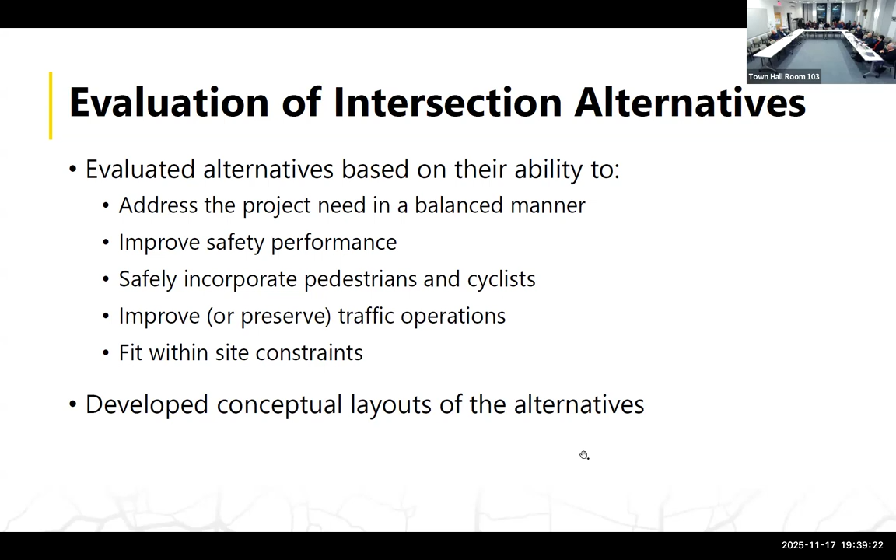We've applied a set of evaluation criteria to try to dwindle that down. The evaluation criteria tries to find solutions that balance the needs at the intersections, which relate to both safety and operations, with the site constraints. So we're trying to find solutions that fit the site, but also incorporate a wider variety of thought and data than just traffic operations. We applied that criteria to all the options presented in the previous table, and all of this will be documented in a technical memorandum.

The presentation is available - I'm racing against time here. You can look at all the options that we've evaluated, and what we screened down as preferred alternatives are 2 different alternatives per key intersection.

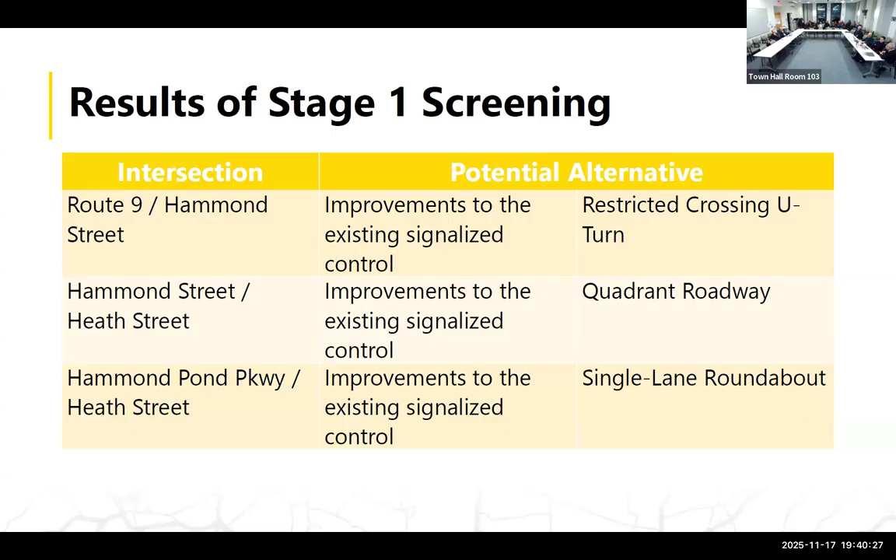It's primarily making traffic signal upgrades and lane configuration changes to the existing traffic signals to make them more efficient or safer. For Route 9 and Hammond Street, we're looking at a restricted crossing U-turn intersection type - I'll describe that in a second. For Hammond Street and Heath Street, we're looking at a quadrant roadway as a potential alternative to the traffic signal. And for Hammond Pond Parkway and Heath Street, the alternative to the traffic signal would be a single lane roundabout.

Starting off with Hammond Street and Route 9, the improvements to the traffic signal that exists there today would be to add left turn lanes, to rearrange the lanes on Hammond Street itself, to have dedicated left turn lanes. That allows us to use protected phasing for the left maneuvers off Hammond Street.

That increases the efficiency of the intersection and decreases the potential for angled crashes, increasing safety for motorists. It also doesn't preclude us from adding signal enhancements to protect pedestrians, or using a leading pedestrian interval for the intersection when pedestrians are crossing. It's really effective because it uses the space we have at the intersection, without impacting the corners in terms of right of way, so it has advantages because it fits in that footprint.

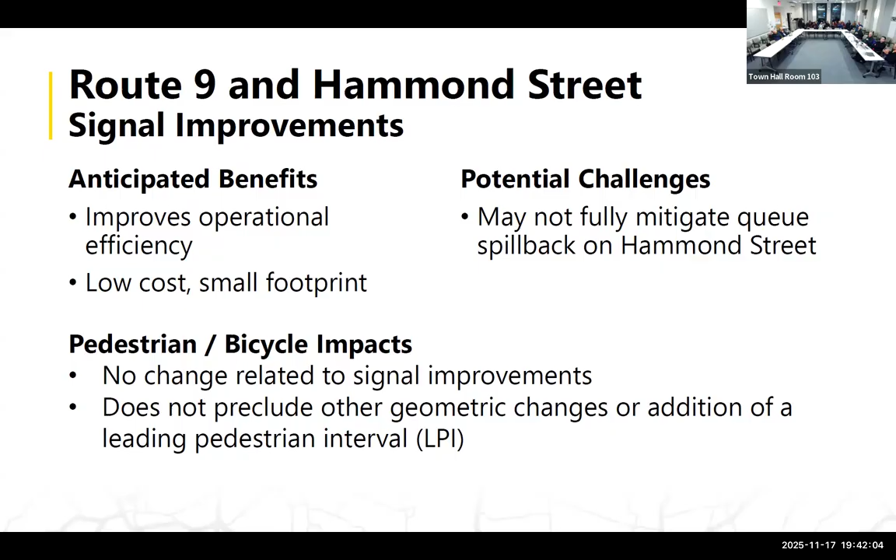I think the next slide will go through the benefits and some of the drawbacks. There's only so much we can do with a traffic signal in terms of optimizing traffic, since we're still working with the existing width of the roadway. We would be losing a through lane on Hammond Street, which could still create queue spillback down to Heath Street. That's the main drawback to that option.

The second option is the restricted crossing U-turn. What happens here is we're trying to create efficiency in the intersection by removing the through traffic from Hammond Street and the left turn traffic from Hammond Street from directly accessing Route 9. So in order to make a left turn or go through on Hammond Street in either direction, you have to do some out of direction travel. All movements out of Hammond Street are right turn movements onto Route 9. You travel down Route 9, make a U-turn, come back toward the Hammond Street intersection, and either continue on Route 9 or make another right onto Hammond Street.

The next slide should provide context for why this simplifies the operations. It removes a lot of the conflict points that happen at one specific location, the intersection itself. So you go from about 16 crossing points at Route 9 and Hammond Street to just 2. With the restricted crossing U-turn, the only 2 crossing maneuvers are the left turns off Route 9 onto Hammond Street. That increases efficiency, increases safety, but adds some out of direction travel.

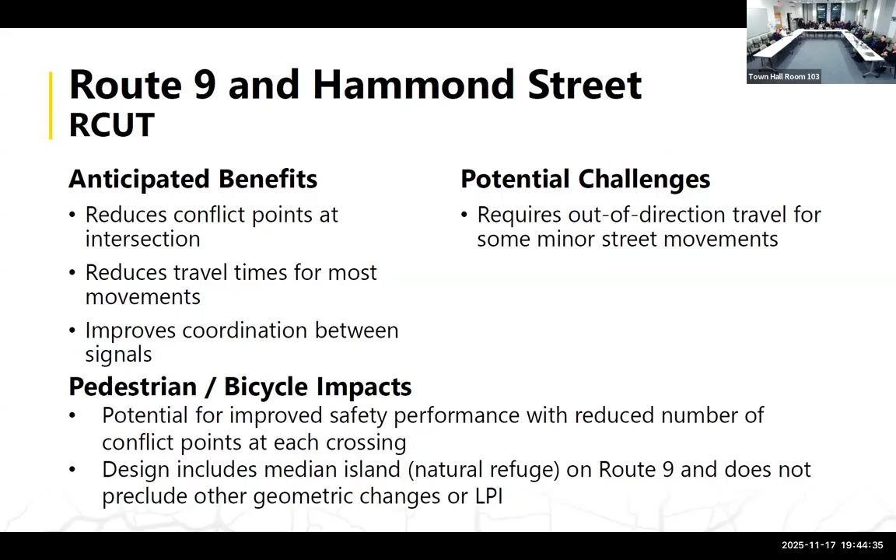So both the traffic signal and the RCUT have opportunities, but also some constraints associated with them. Moving forward, we will spend more time looking at those opportunities and drawbacks. So, for Hammond Street and Heath, again, the traffic signal could be updated in terms of lane configuration on Hammond Street to create a protected left turn lane in the northbound movement.

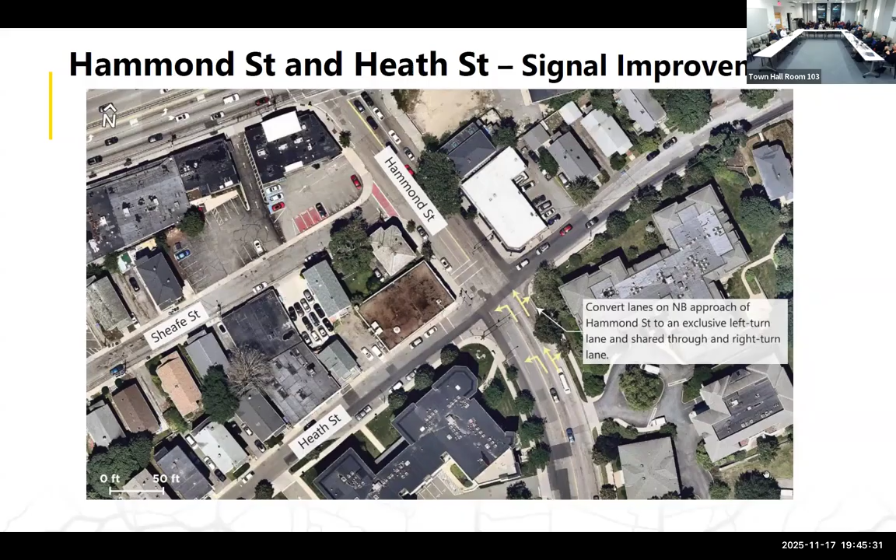That reduces the potential for angled crashes. Again, it could introduce a protected left turn phase, so when left turns off Hammond Street go to Heath Street, they have an arrow while traffic in the opposite direction is stopped. So you don't have the issue of people trying to find gaps in traffic to make that movement. However, this, while pretty neatly packed in that intersection, is still impacted by the queue spillback that can occur from Route 9 into this intersection.

From a pedestrian and bicycle perspective, we're again looking at creating protected time within the traffic signal phasing when people can get out into the crosswalk, start to advance, and not conflict with other cars. That exclusive left turn lane removes one of the potential conflicts between cars trying to find a gap in traffic, looking for cars or looking for pedestrians in the crosswalk. We're removing that potential conflict there.

So the second alternative at this intersection would be to apply a quadrant approach. This simplifies the movements at the intersection between Heath and Hammond Street by moving the left up the street to Sheafe.

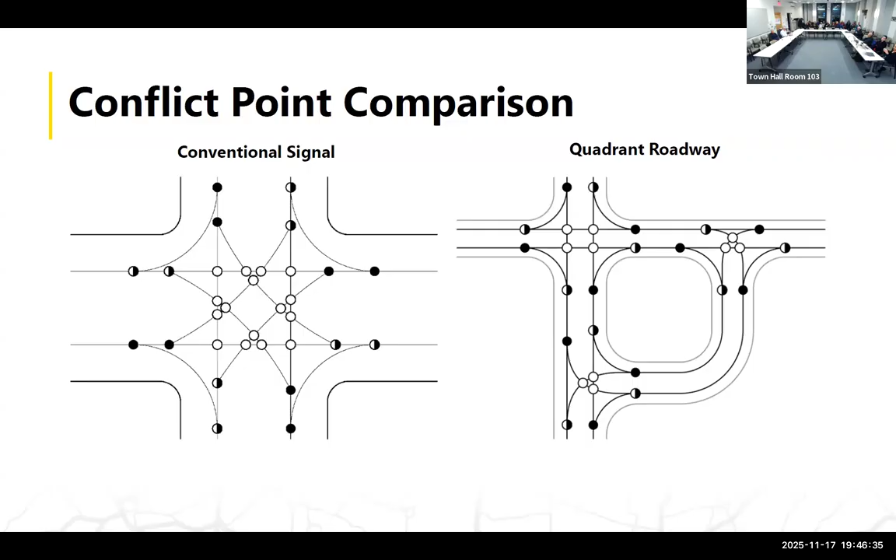So if we go to the diagram, I think that's going to speak a little bit better to the conflicts. We're moving from 16 conflict points to about 11 conflict points for the main intersection, and then 9 more at the two intersections that are created.

So the challenge with this configuration is it will create more efficient operations. It reduces the conflicts between cars and pedestrians at the intersection, but it does create out-of-direction travel. And Sheafe actually puts us closer to the Route 9 intersection.

And we know we already have a queue spillback potentially building up on the south leg of the intersection. So we really have to dial in a little bit of the analysis to understand how that queue spillback would interact with the lefts that people are making off Hammond Street now at Sheafe instead of Heath.

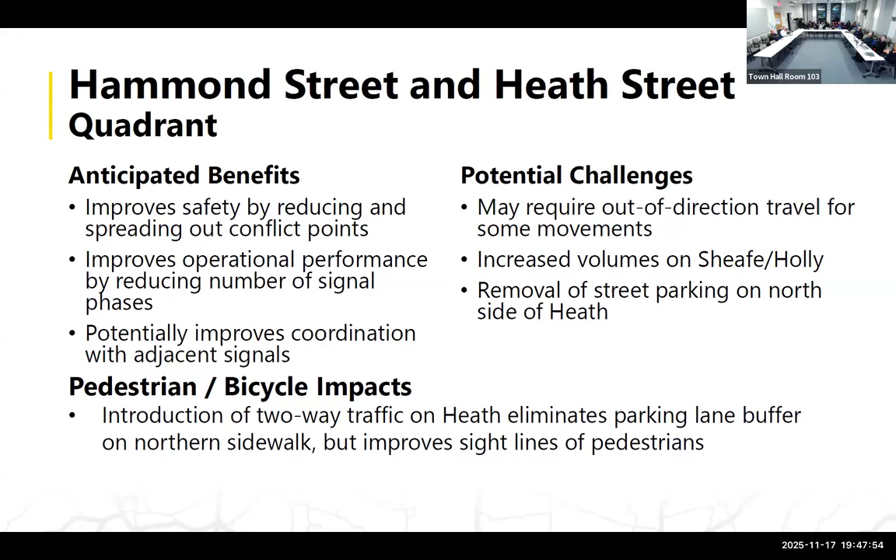Some other drawbacks: the Heath Street would have to be a two-way roadway, not a one-way. That requires the loss of parking on one side, which is probably disadvantaging the businesses on that block.

Moving on to Hammond Pond Parkway and Heath Street. The signal option could be improved by taking the center lane and converting it to an exclusive left turn lane for both approaches of the Hammond Pond Parkway. Also adding a right turn lane on Heath on the west leg, so coming into Brookline.

Both of these additional lanes increase efficiency, but also improve safety. This is a location that's notorious for angle crashes between people trying to find a gap in traffic with two lanes approaching them from Hammond Pond Parkway to Heath Street. So that left turn lane would really help that operation.

The additional right turn lane on Heath Street would make operations more efficient, but that could also attract more cut-through traffic on Florence Street to Heath Street, because now the intersection's operating a little bit more efficiently. It could also have some right-of-way implications on conservation land, which is adjacent. So it's not a slam dunk option with the traffic signal.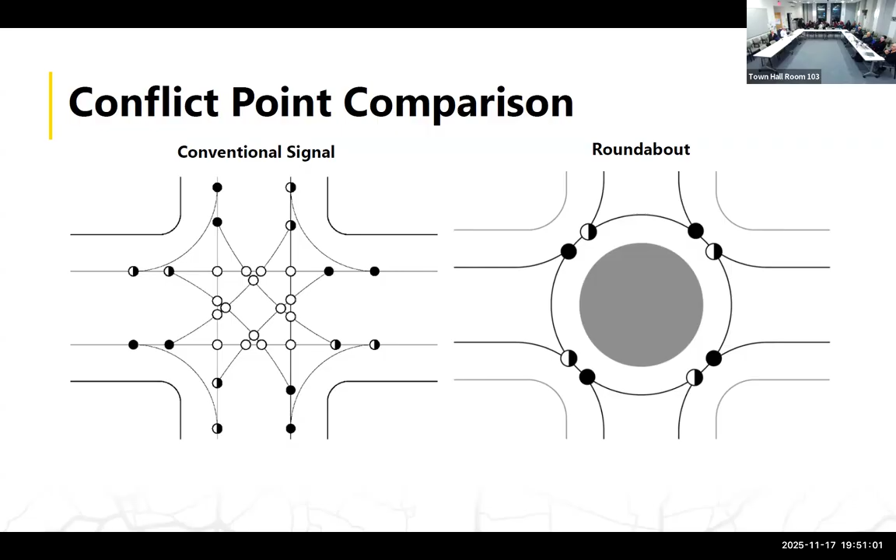So you're talking about one of these flat... No, it wouldn't necessarily be a flat central island. It would still have a central island, right? But it would only have one circulating lane. Right, but when I say flat, I'm thinking about the ones that have a central island but also a slope so a fire engine can maneuver. Yeah, exactly. There'll be the truck apron for sure, yeah.

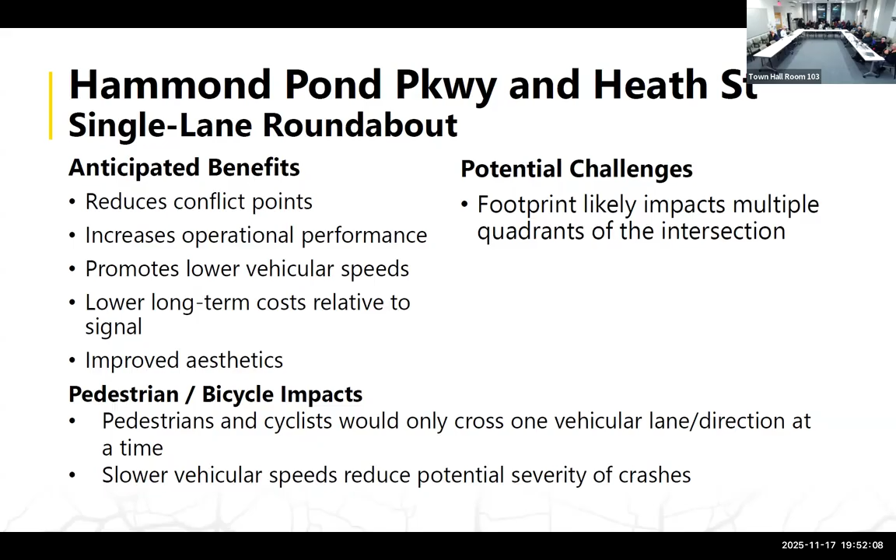So there's a lot of advantages with the roundabout from a safety perspective, from a traffic operations perspective. But the footprint would impact most likely all four quadrants. So without sketching one out and understanding a few more details in terms of their impacts, it's difficult to say to what extent we would get into an Article 97 right-of-way acquisition type process, which could derail the development of an alternative like that.

So our next steps are to work on finalizing those concepts, finalizing the network plan, and to really start coordination with City of Newton, MassDOT, and DCR, to show them what we've done so far and see how it's received. And then hopefully kicking off phase 3 in January.

Okay, all right. You've done very well. As you know, I was very concerned about time. I appreciate that, as you worked through this and hit the high points.

So again, as with the design guidelines, the entire document with all of the detail is on the town's website.

If you download the packet that comes with the agenda for this meeting, it's all there. I've been looking at it myself on my own computer to read the fine print. So questions from the committee, and then I want to take public comment.

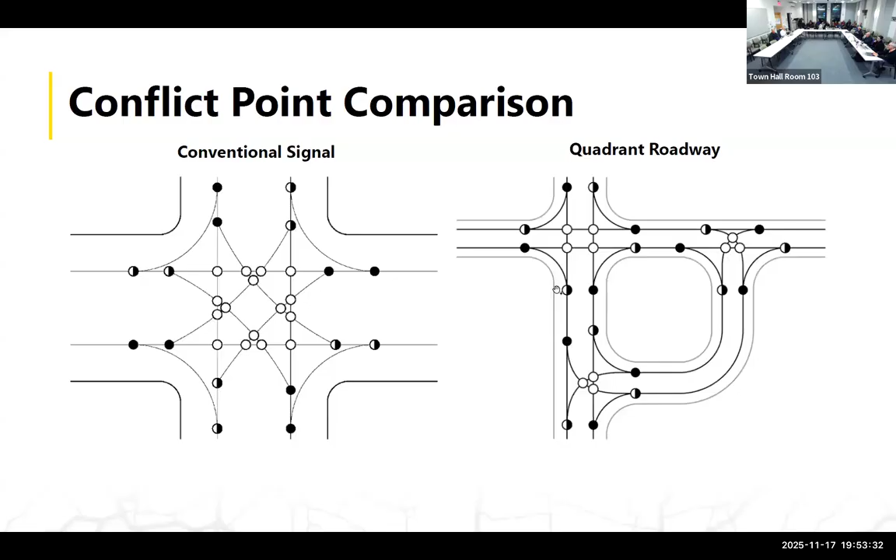There's a lot to unpack, but I'll point out a couple things. Can we go to the first slide showing all the different alternatives, where it showed the paths, the bicycle path. I think it's a little rich for Brookline to be suggesting anything on private land in a different town. If we want a path, do it in our town. So we need to figure out how to do that north path in our town.

Right now it's not doable because of the town boundary. I will say that I bike through the back of the street. But maybe the solution really is Heath Street. But I think if we propose something on private land in a different town, they're going to say no. Unless we talk to Newton, but it is private land.

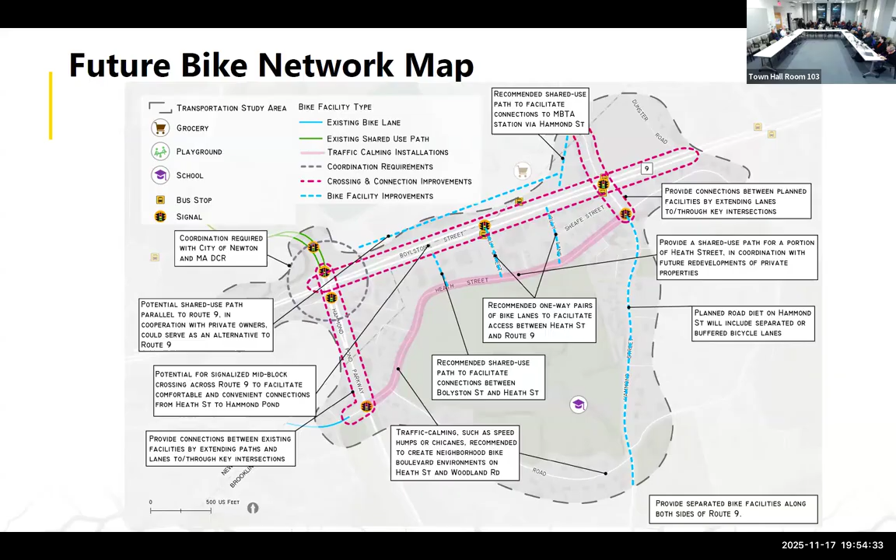If there is a lot of bicycle traffic, they may be concerned with their own pedestrian traffic and how that impacts their commercial activity, which is why they're there. So I think it really has to be on our side to figure out how to do it. If we can't do it, then maybe that's telling us something.

The next one was, I think, the same thing with the pedestrian experience. I think we just need to make the pedestrian experience along Route 9 much better. Because the moment you make Route 9 a nicer experience, you're also telling drivers something.

Route 9, for example, when it's Boylston Street, when it goes into Boston it's Huntington Ave. It's still Route 9, still like 2 lanes and 2 lanes with integrated trains. But what makes it feel like you're in the town is the density of the housing and the sidewalks, so you feel like you're not on a highway anymore.

That's a horrible transition, right? From Boston, but people are going slower. So I think what we really need to achieve here, and it's the same thing we discussed in the lower Boylston Street committee discussion, is how do you turn Route 9 into something that feels more like a street rather than a highway.

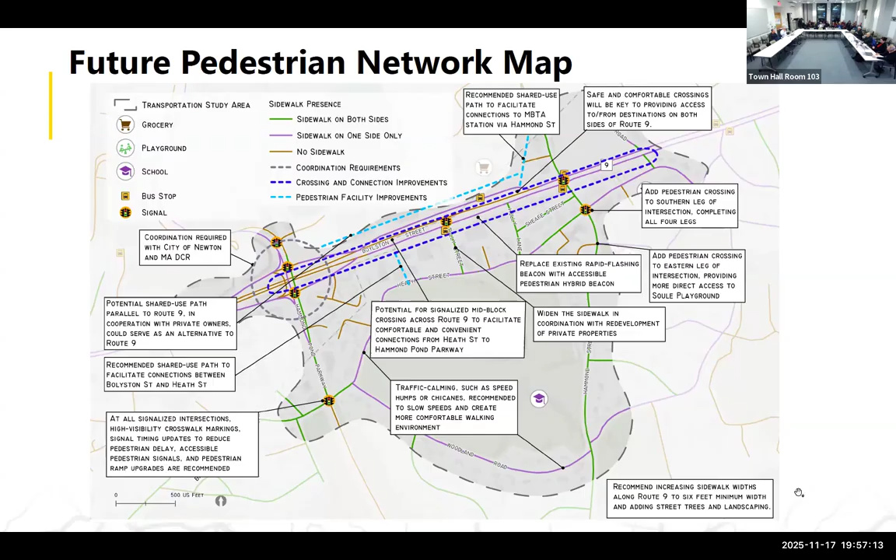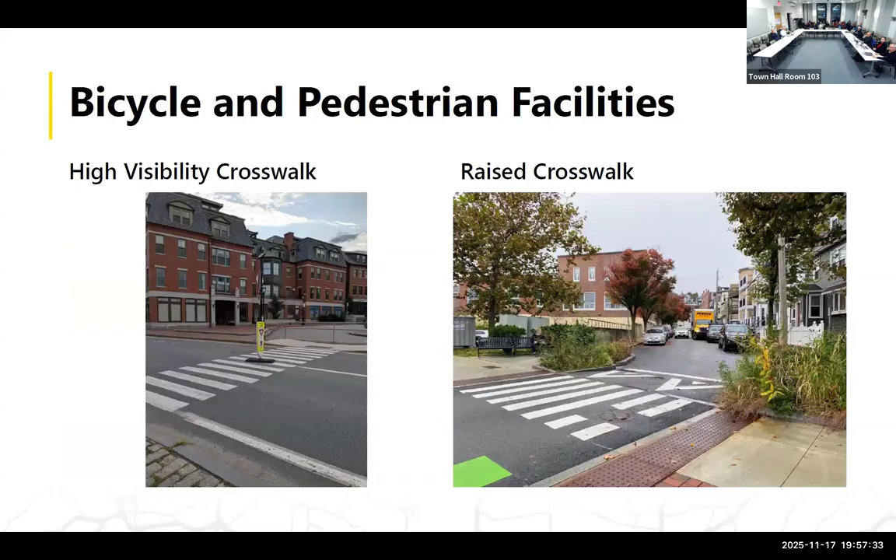That's just silly because you're feeding the pipe more water than it already carries. It's like if that was made out of rubber, it would just be a big bulge of water there that's trying to go around in circles.

And also it's just confusing because when a fire truck is going, I'm assuming, I don't know if they're going to be physical barriers, but I'm assuming a fire truck is going to be able to go straight onto Hammond across Route 9. It could be developed that way. Which means when a fire truck is coming, no one's going to know the way out because they're not going to know that they can go across.

This happens on Wellesley at Route 9, and there's a big sign that says cars only because trucks can't do it. Hammond Street is the connection to our DPW yard, so all the plowing trucks, gravel, everything goes down Hammond. So it needs to be truck friendly, unfortunately.

So I think this diagram is silly because you're basically adding more traffic to Route 9. And then if you go to the next one, I think adding traffic to the neighborhood is something we definitely don't want. The quadrant, yeah. If I were living there, I'd say no way do I want all that new traffic that didn't exist there.

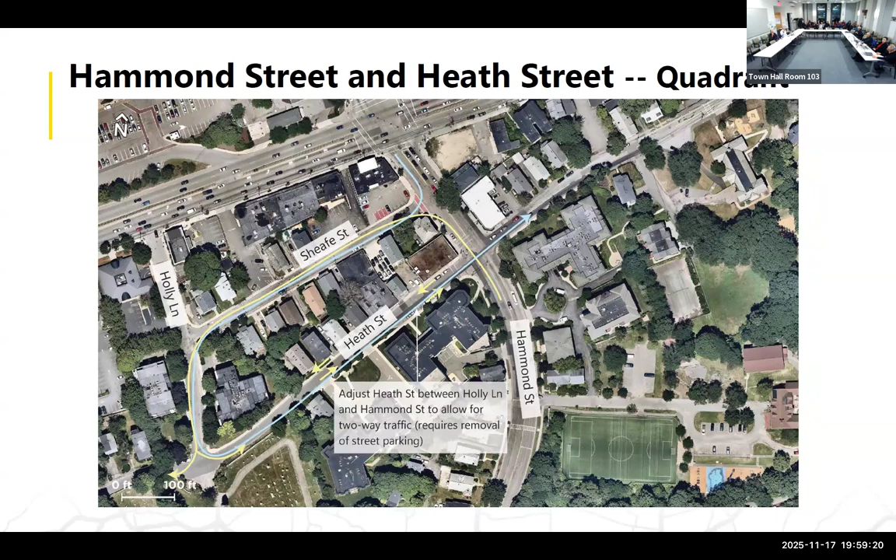And then the third one, which is the roundabout. I just think, how are you going to tell those row houses that they're going to lose their front yard? I mean, the eminent domain or whatever it is, it just doesn't make any sense. Okay, so those are just my comments.

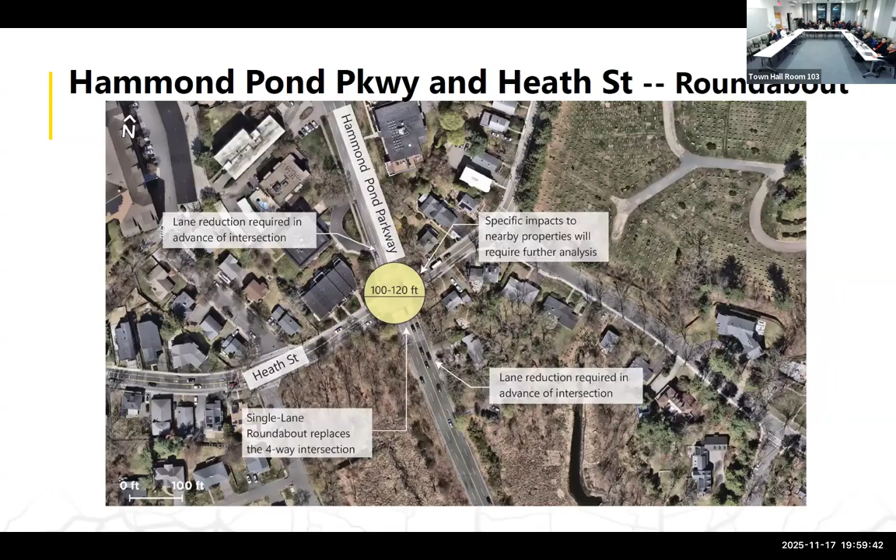Lynda Roseman is online. Go ahead, Lynda. Thanks, Mike. A few things. One, I want to emphasize what Carlos said about enhancing the pedestrian experience on Route 9. The second quick thing is we need a stop sign at Tully and Heath Street.

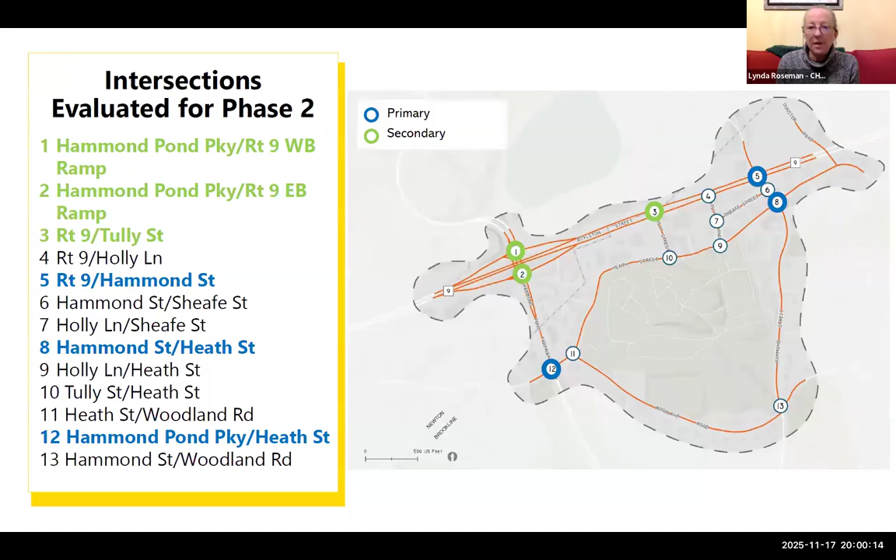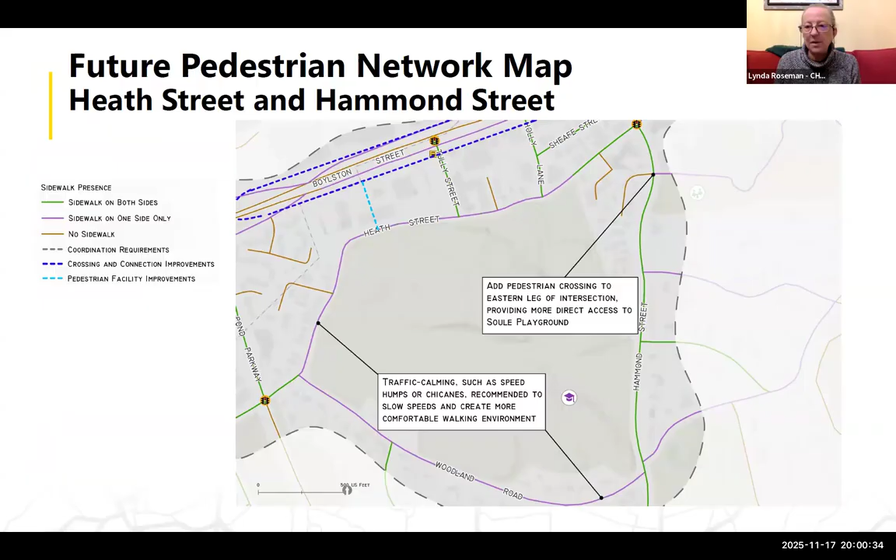But the main thing I wanted to ask about is the development being proposed at the corner of Hammond, Sheafe, and Heath, where the Cleaners is now and where Michael Hines is now. I haven't heard anybody even mention that, and it's going to add a lot of density and a lot of traffic. I was wondering whether the people doing the traffic study had taken that into consideration in all the things they're looking at.

And weren't they doing something to the parking and the street with that project? Yeah, the DPW approved a bump out and a pullover area for Uber and Amazon and things like that - a slight change to one side of that project. The 40B was approved, but it's currently under appeal. So that's the status of that.

And so 45 units and 6 stories. 45, okay. And the pullover for pickup and drop off is on Hammond? It's on Heath. Okay, so we did share the traffic impact report and all the transportation-related analysis from the Heath and Sheafe project with the Kittelson team.

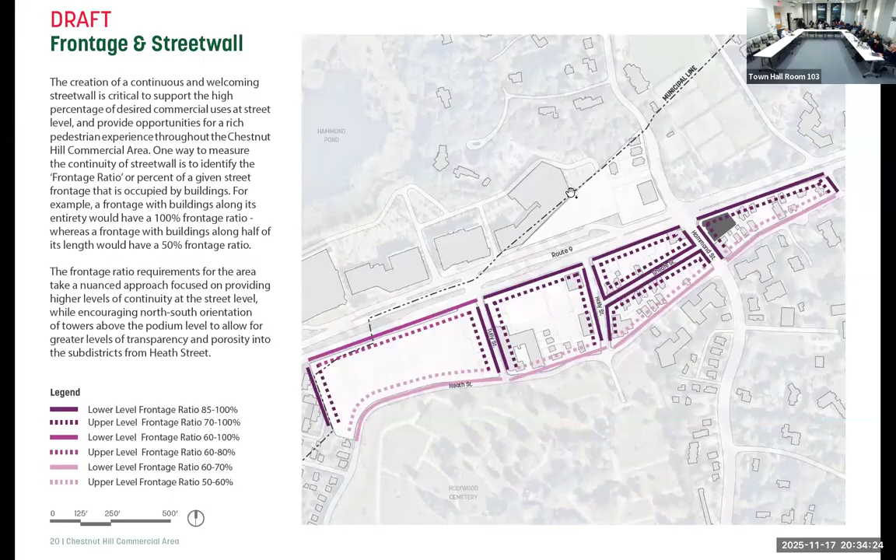Is it possible, Mayor, to put up one of those zoning maps? One of the things that's been confounding in coming to these meetings over the past—we're going on two years—is that there's this bifurcation in the Chestnut Hill commercial area study, between creating zoning and a particular development proposal. It bounces back and forth, making it very hard to concentrate on the process, because the process keeps getting fragmented. If you could get the one that's just a flat zoning piece, that would be helpful.

I've spoken to a lot of individuals on the committee, and at meetings, to say that as abutters and neighbors, we want to support this. I think there's a lot that's happened that is in the right direction with the changes. There's clearly a conflict that this rezoning needs to balance: impact on the neighborhood, the town's needs for additional commercial tax base, and importantly, the need of housing. We're aware of that, and we're with you on that. I think the challenge is, and this is one of the things George spoke to, is where's the economically viable area here, especially now that we're in a kind of crummy commercial development environment.

With the prices of materials going up a lot, I think a perfect example of the fact that it's not a very robust market is that great project on the Durgin Garage site. That had a lot of public input, a lot of work was done on it. The building's been torn down and nothing's happening. So I think that speaks to the fact that there's something precarious going on in the market here.

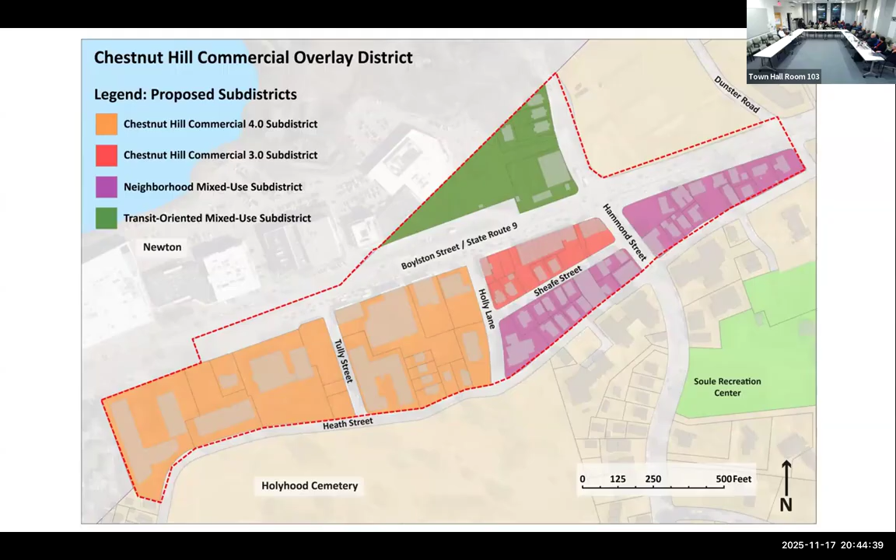Yeah, and you want to go further? I interrupted, I thought. No, I said, I made a significant comment about the process and the way in which we are once again in a position of reacting to a very dense, confusing, not clear set of slides. And yes, to reiterate what other people have said, we are in for making something happen here, so that it's not the case that we're not. So that's the note I'd like to end on. So I have, you're right about reacting.

First time you hear information is, after all, the first time. This is the first time I've heard it as well, and I agree with you. I know I have to get into reading this stuff in detail in order to understand the implications of these design guidelines. That's true, yeah, it's a little bit less true of Kittelson because I understand a bit more about transportation issues, so I'm perhaps not taking as close a look at it for the first time as most people. But you're absolutely right, we're all reacting to the same thing.

First time you hear something is the first time you hear it, and there's really no way around it. I think there is, but that may be another discussion. You could set up a meeting where there was more opportunity and time for give and take, like a week later, let's go back and look at that for people who have the time to come and talk about it. Well, that's on the table after all. Well, you could set it up then.

We're absolutely trying to do that without making you feel like you're just reacting. What are you looking for?